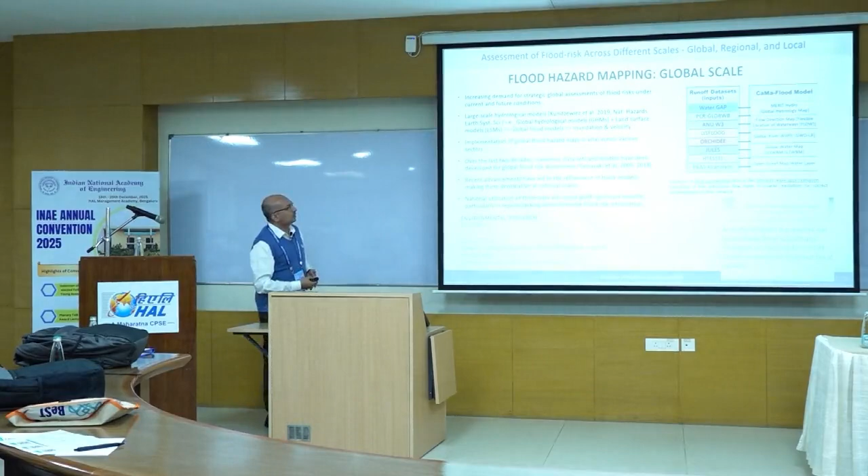But please remember that global flood modeling is for effective hazard and risk mapping, not for precise flood forecasting. So that's the important point.

Finally, I would like to mention two things I understood. There are many regions in India where balkanization is very prominent. If you take the example of Mumbai, flood data and other things are available with MMRDA as well as MCGM — that should not happen. There should be more pluralization, where all the datasets etc. can be shared among the civic bodies themselves.

In every assessment report of IPCC, you can see there is a change — the definition of risk is evolving. So how to address this problem? That is also an important aspect.

In my opinion, there should be a community modeling scheme, as we have different examples like the climate model and the land surface model. That community model concept we need to bring. So if I develop a flood model, that should be available to all, and that particular model should be improved in future. So the community model concept we should bring into flood modeling.

Traditional flood modeling may be difficult to address or to solve this global scale, regional scale, and local scale problem. Thank you so much.

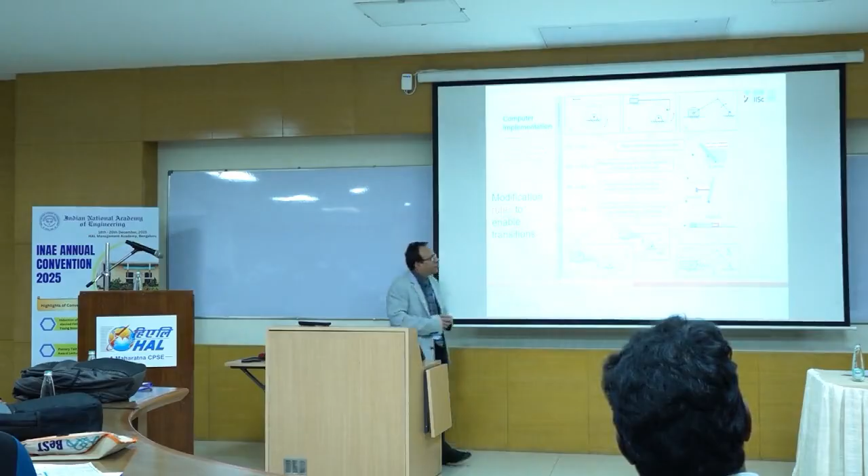Now, there are a lot of other examples. For example, I have an automated tool with which you can create feedback sensors and so on. But let me just show you one more and then stop there, which is the world's first tool on biological inspiration - Idea Inspire. This is something we created with funding from ISRO. We wanted to make our rocket scientists more creative. And what did we do? We wanted to create, for example, very different kinds of solar antennas than the ones currently used.

The idea is very simple: how do I use a glorified database of natural and artificial systems, described using that Sapphire model of how it works, and then when somebody comes up with a problem saying I'm trying to solve this, show which ones are the most relevant solutions that exist in artificial and natural space, so I can simply show them to get inspired. By this inspiration, they will lead to multiple designs. So here, for example, is a non-vegetarian plant called the Venus flytrap, and the Sapphire model is used to describe how it traps and utilizes the essential nutrients that it doesn't get otherwise.

Or a friction disk, which is, as you know, a continuous gearbox that you use for...

Prof, two more minutes. Sure, we're getting close.

And we did that evaluation. Multiple designers came up with ideas on their own, and then when they got exhausted, we introduced Idea Inspire.

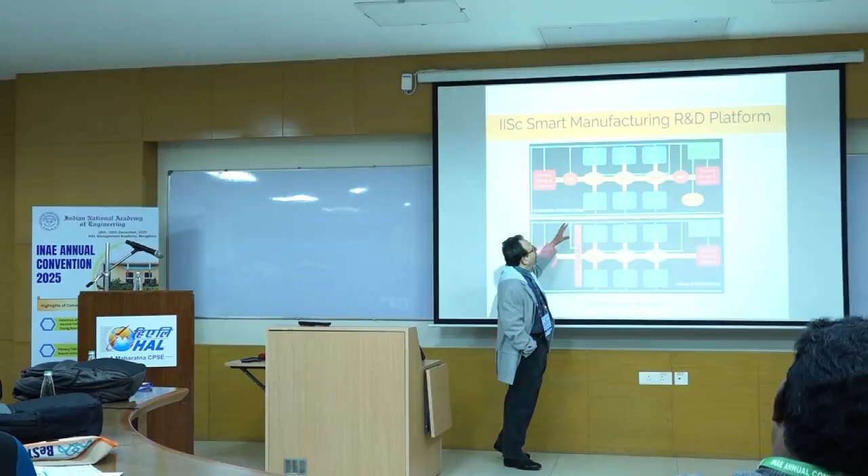But these blue lines are important. They are all connected. We are taking data from all of them, putting it together, making sense of it in an analytics station, and these two can be connected to each other. So you can create all kinds of hybrid factories.

A little bit of automation, a lot of manual, or the other way around. And with that, we can look at how do they play out in terms of quality, safety, productivity, resource utilization, and so on, including sustainability, which has been the topic of today.

So this was inaugurated in 2019. That's a digital twin of the factory. This is the heavy industries secretary using that digital twin to see what's going on. And that's a combination of automated guided vehicle and a cobot to do both dexterity and mobility.

And that's a digital twin in more detail. You see the regular wire EDM, laser router and so on, the automation-centric one, but also the legacy area with regular lathes and other things, and the multiple layers, edge layer all the way to the execution layer.

Last one before I close, and that's IISc DeBox. Another question is, how do I democratize design to school children? And people have been talking about it. One thing we did was look at the way in which training happens right now.

So if you analyze the CBSE exam papers, there's something very interesting that turns out. You know about the revised Bloom's taxonomy, right? That basically says what are the cognitive processes we should train people in: remember, understand, apply, analyze, evaluate, create.

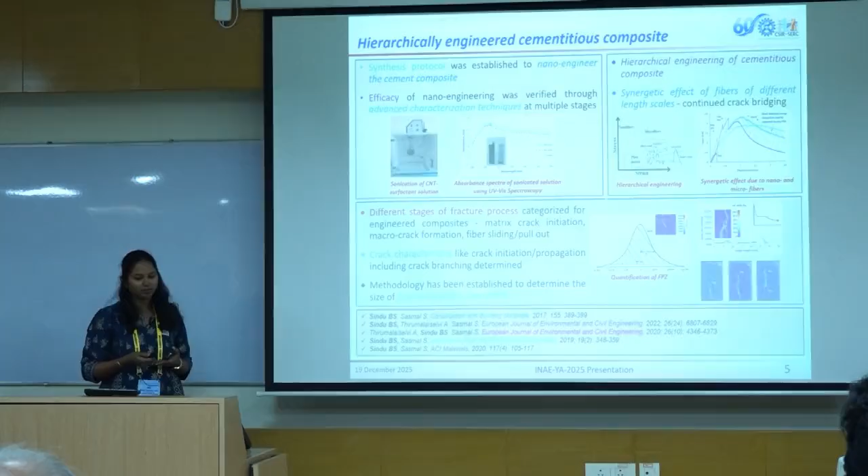Then moving from concrete, we have also done some studies on FRP composites. Basically these FRP composites are used more in the repair industry for concrete structures, and nowadays there are many FRP based components or structures which are being realized. So to understand what phenomenon takes place in this FRP composite and how different environmental degradation factors affect these structures, FRP materials, we have done some fundamental investigations.

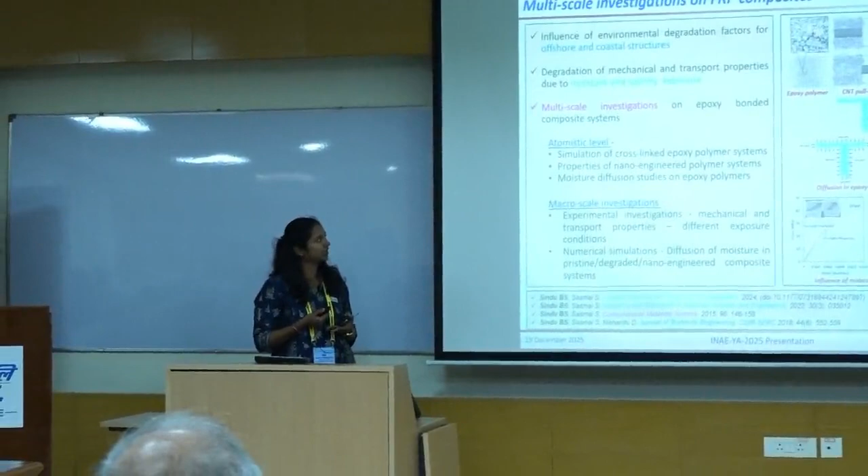Basically in FRP composite there is a chemical or adhesive agent called epoxy, and this epoxy undergoes degradation with different environmental factors. So we have tried to understand how these environmental factors affect the properties of epoxy polymers, for which we have done some fundamental simulations and also some experiments at different length scales.

Sindu, if you could conclude. Yeah sure. So from these fundamental investigations, we have come up with some of the technologies.

One such technology is the piezo-resistive cement-based composite, which can be used as an embedded sensor. It has a self-sensing capability and can be embedded into the structure, and it can also work as a sensor. We have also tried to use this multi-scale reinforced composite to enhance the seismic performance of beam column joints, and also as a retrofit material, cement-based material, which has a very high strain hardening property, or the ductility index is very high. So these are the outcomes of the work.

So in terms of technology, we are also working closely with industries to give industrial solutions in terms of assessing the structural adequacy of the structure, and also to enhance the capacity or service life of structures. So to summarize the work, we have been carrying out studies from the fundamental length scale using the bottom-up approach to understand and engineer the materials which are used in infrastructure. So this is the work that has been carried out. Thank you.

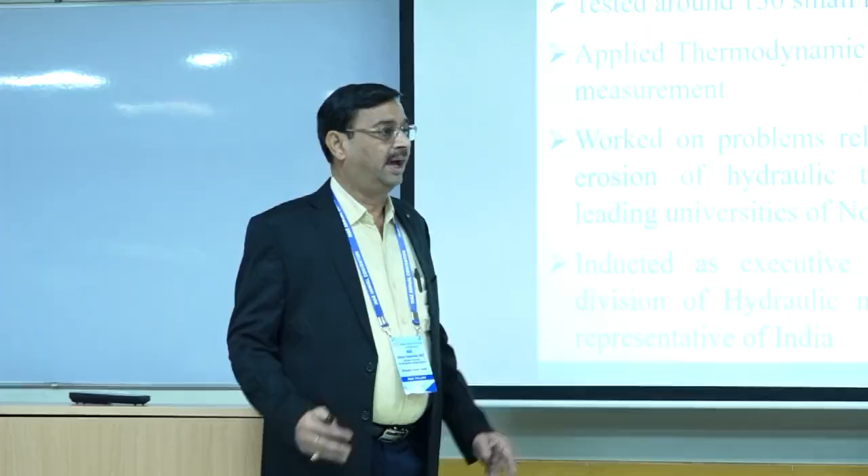This responsibility was given to IIT Roorkee, so we formed a team, and I'm a founder member. My responsibility is the hydraulic power measurement, and the team also has persons for electrical power measurement and some civil engineering persons. We tested around 130 small hydropower plants all over India, advised them to improve their efficiency, and conducted efficiency tests. Particularly the thermodynamic method, which is generally done by foreign country experts, we developed this expertise here too, and I conducted this study in 2 of the power plants.

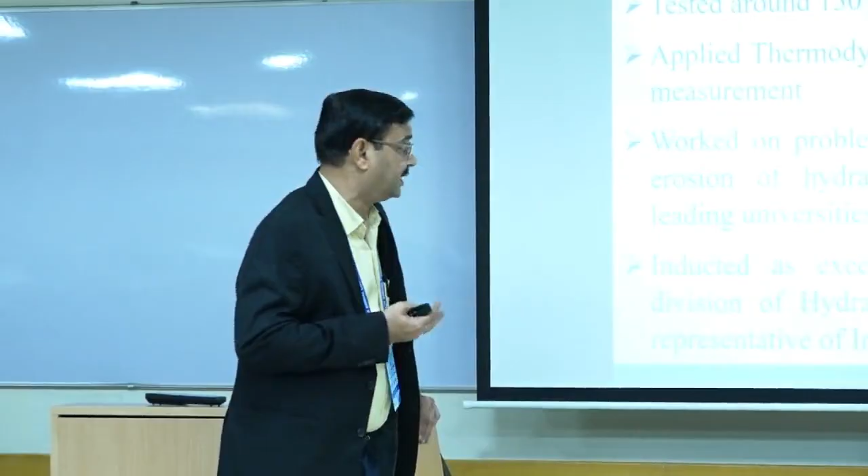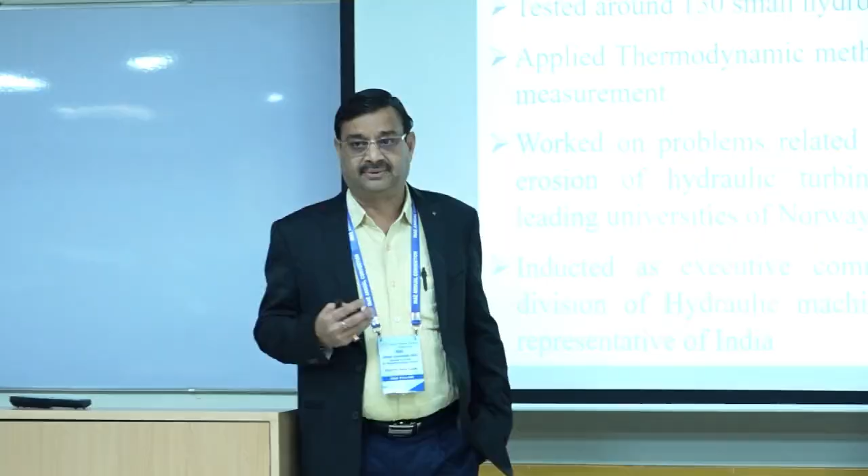Then, when we learned hydropower plants have problems, we started research in operational issues, particularly sediment erosion problems, which occur because of the Himalayan region. We collaborated with foreign universities too, since earlier we didn't have the facilities. Now we have developed our own facilities, so we work with those. I will share some work done with these universities, as well as work I started on my own in my institute. I was also inducted in 2019 as an executive committee member of the IAHR Division of Hydraulic Machinery and Systems, as the sole representative of India. So now we have representation there also.

Now this is a typical hydropower plant, but this is not the only type. This is only the dam-based hydropower plant, where we have the turbine and the tail race, and some water is coming with some hydraulic power, and then it goes to the generator and the transformer and then the grid.

My focus is the turbine particularly, because I am a mechanical engineer. And we have seen that nowadays also a lot of penetration is there because of the solar and wind energy, which are the intermittent form of energy.

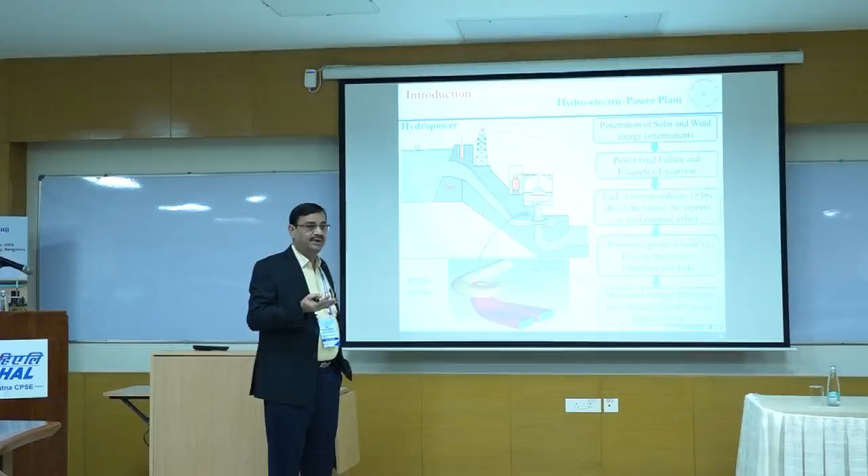So when we go to the testing of the power plant, we find that there is a frequent power grid failure, and there are some frequency excursions also. Because of that we feel some vibrations, because of the potential variations.

And there is a notion that each start-stop reduces 15 hours of the life of the runner, but no data are available if you do the load ramping to balance the power because of solar and wind intermittency. So we started a study on the transient operation of the power plant. Particularly this is true with small and medium hydropower plants, those not in the captive category. And we started this investigation.

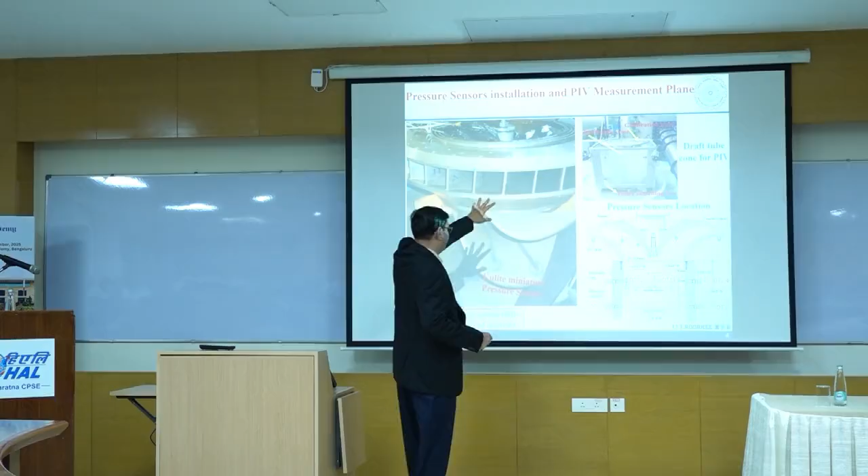So what we did is we fitted some miniature sensors on the runner, and some sensors on the draft tube. They are pressure sensors to monitor the pressure. We maintained a special arrangement to measure the velocities also in the draft tube cone, which starts just after the runner. Here is the plane where we have measured, and this is the center line where we are monitoring the velocity. So we have measured the full flow field, pressure and velocity in the draft tube, and pressure only in the runner, and in the vaneless space between runner and the guide vanes.

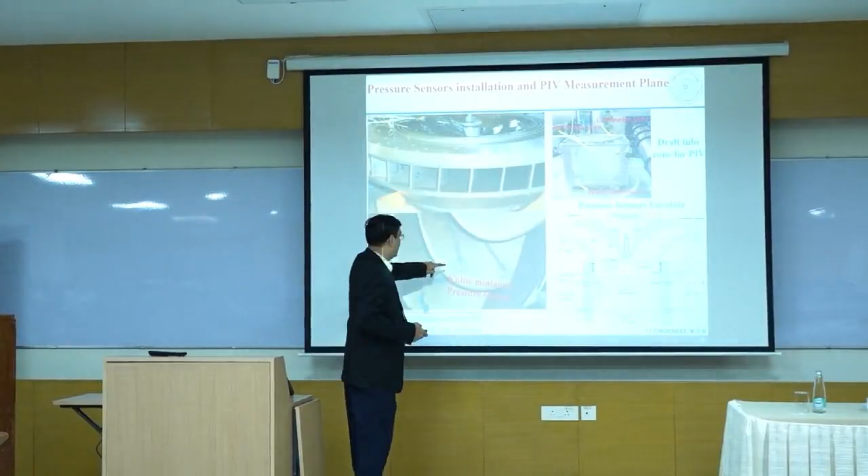When we see this, this is the pressure P12, P72, and we have named them here. And one is the suction side, P71. So these pressures, we have seen, when you reduce with load rejection, these pressures will be fluctuating.

And if you stick to a small window where the frequency is around 1 kilohertz, there you will find that there is a lot of fluctuation over the mean pressure. The pressure will give you some frequencies in the runner which is equal to the guide vane number, and in the vaneless space which is equal to the runner blade number.

Now if we see the velocity variation, which we have measured using a particle image velocimetry system, from high load if we come to below best point, there is some stagnation region forms, and that stagnation increases, decreases, and that gives a phenomena of vibrations.

One is the plunging component and another is the rotating component. So plunging appears before and earlier, and then the rotating component, and then as we go to the part flow, the problem becomes more and more severe.

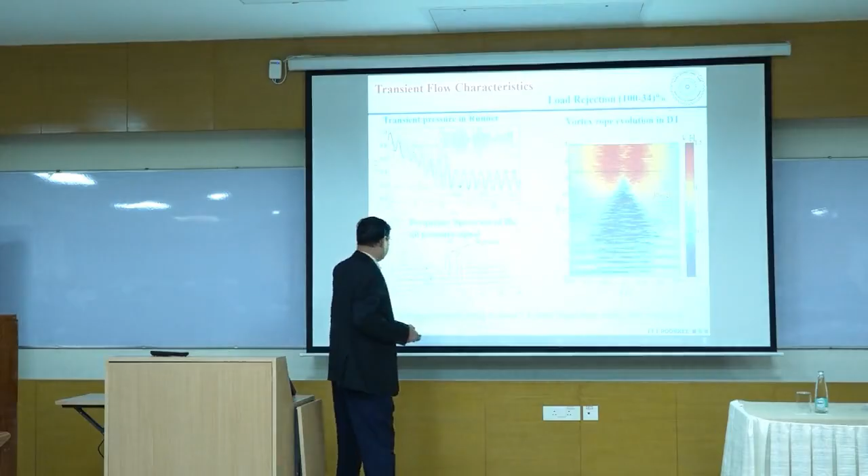And the same thing if we are going to load, in this case the transient pressure loading in case of load rejection is 2.8 times larger than the pressure fluctuation in the steady state. So this also gives a loading on the runner.

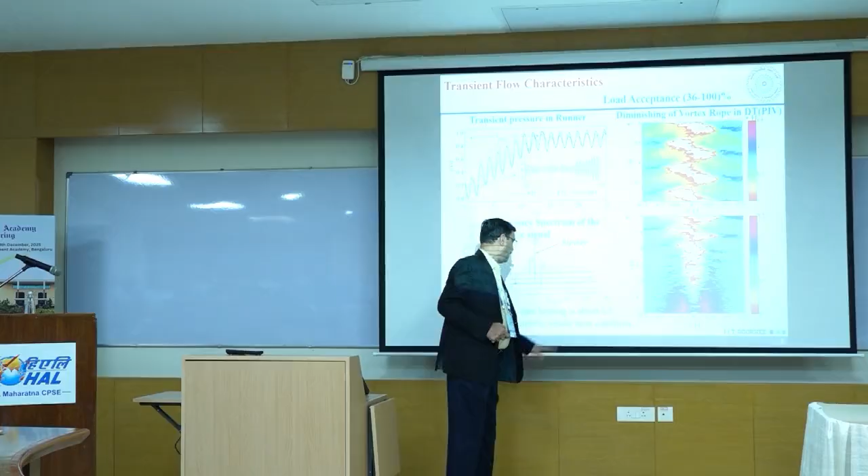Now if we go to load acceptance, it is 36% to 100%. Then we are having again a separated flow will converge, and here this stagnation region before reaching the best point will diminish, and then again our flow becomes full flow in the draft tube. Here again this transient pressure loading is a little lower, it is 2.1 times compared to the load rejection of the steady state condition, but still we are having transient loading here.

Now if we see the emergency shutdown, meaning suddenly if there is a grid failure, then suddenly it will go down. If you are having an emergency shutdown, then it will result in total load rejection, and that gives you more pressure fluctuations in the runner, particularly in the vaneless space, it is 200 times, 200%.

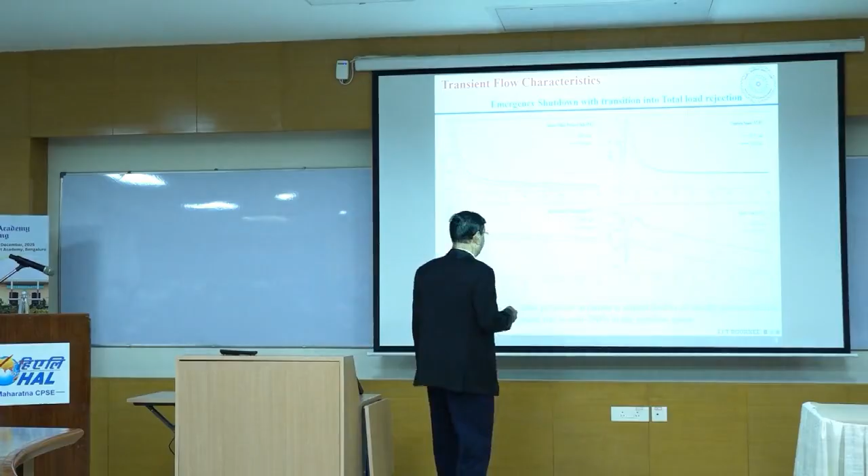If we see the pressure fluctuations, then around the mean line, the best point, runaway, and this runaway is for runaway from 9.98 degree, which is the best point condition. This is the full load condition, so full load condition you are having more pressure fluctuation, either in the vaneless space, blade suction side, or runner side, or the draft tube. The draft tube will have the minimum fluctuation, around 0.02 around the mean line.

So that gives you the pressure fluctuation in the vaneless space, which is highest at around 1.8 to 2.2 times of the BP condition. So if you are running the turbine at the BP condition, then your runner life is much higher. But if you are running it to the runaway condition frequently because of frequency excursion or start, your life will be reduced.

With this, we have seen that if we go to proper shutdown, sometimes it requires sufficient time, then pressure fluctuations are not very high, but a vortex rope will form when you go to high load towards BP, and after BP again you get vortex formation. So during shutdown also you get vibration because of vortex rope formation. Similarly, during startup, vortex rope forms earlier, then diminishes as you come to BP, and you have proper flow condition, so there will be no vibration, either in the power plant or while starting or running.

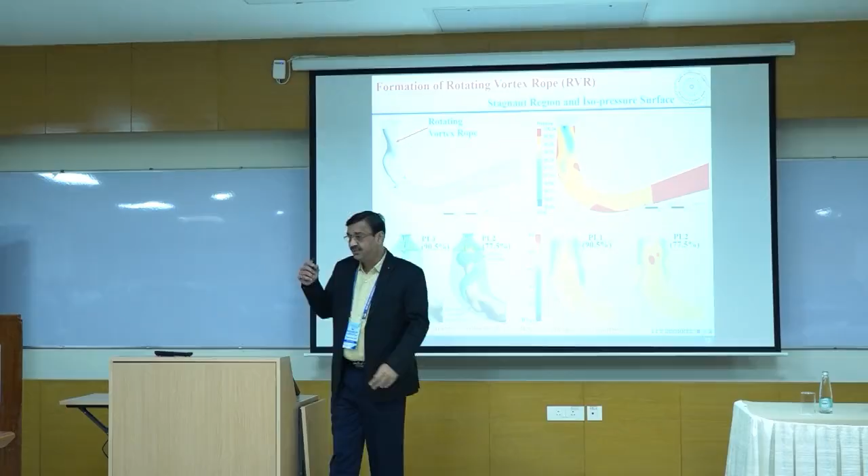We started and made measurements of the draft tube and found that this vortex rope frequency forms at 0.28 times of the normal runner frequency. If you see this vortex rope formation, there will be a zero axial velocity zone formed, and if we can diminish this zero velocity zone, then we can overcome this vortex rope formation.

So we built a special test rig where we have a turbine, and in the turbine we have a method of injecting water jets as well as air jets from the surrounding, so that we can break that stagnation zone.

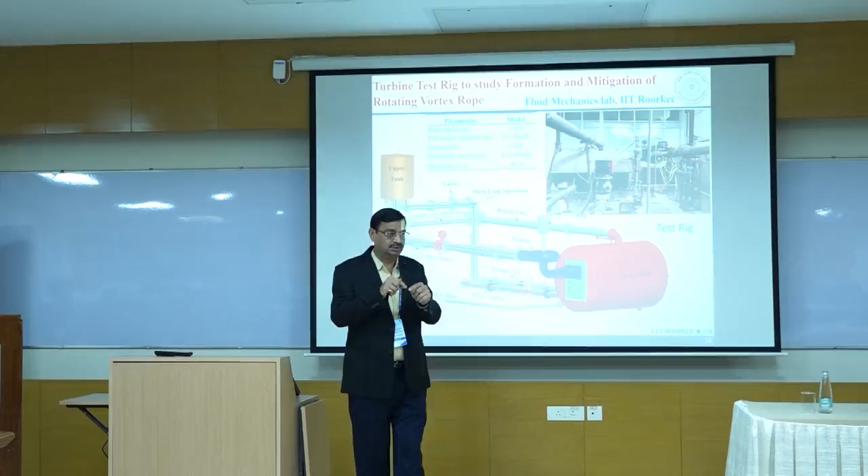This testing was not done earlier; earlier people were doing swirl testing. Now we started water jet injection, with the water jet as a percentage of main flow going up to 2.5% maximum, and we found that we are able to diminish this peak pressure pulsation by 73% in case of plunging, and in case of rotary we diminished it around 65%.

So we are diminishing their damaging effects a lot. Now if you see this spectrum analysis, this is the RVR frequency which diminishes if you go to 0.5%, then 1% and 1.5%, and you will see there is no RVR frequency being seen here.

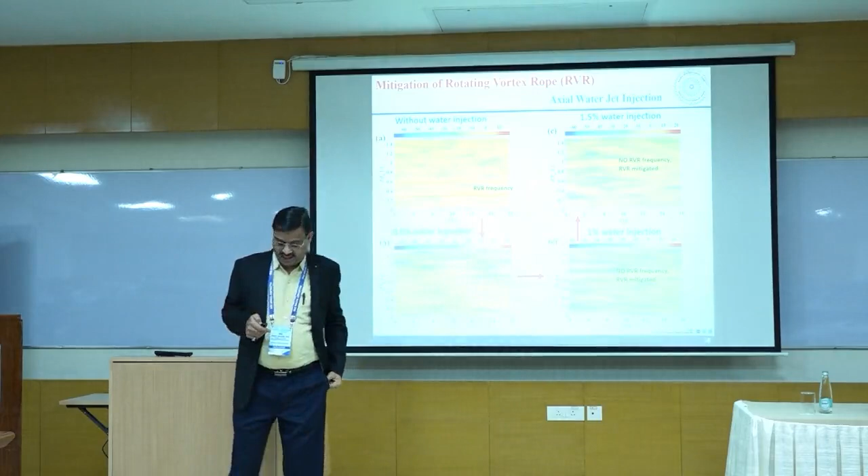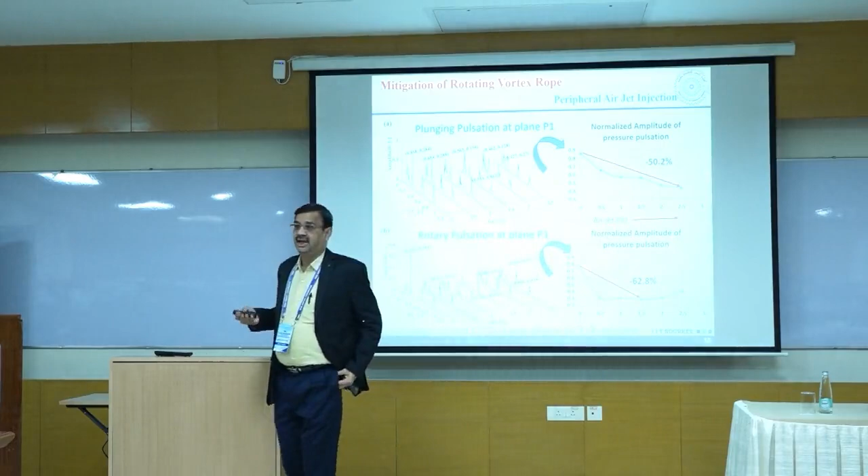If you go to peripheral air injection, then you get diminishing of the pressure pulsation by 50% or 60%, both in the plunging as well as in the rotary pulsations.

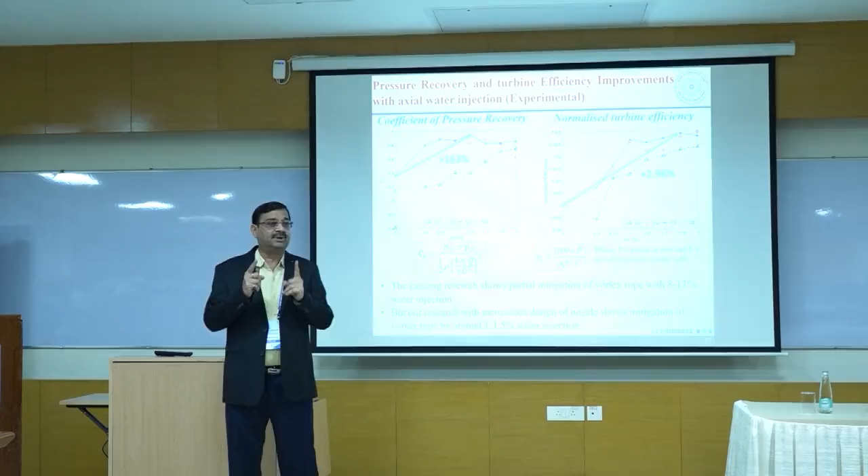If you go to combined air and water jet injection, even 1% water injection and 0.25% air injection will diminish it all. But the existing literature says you have to inject around 8 to 13% of the main flow water to diminish this. We have especially designed the nozzle to come down to 1 to 1.5%, and we are even able to improve the efficiency.

Our key observation is that runner life is affected not only by start-stop, but also equally by load ramping. The maximum pressure rise is observed in the vaneless space, about 200% during shutdown and load rejection, and transient pressure loading during load acceptance and load rejection is around 2.1 to 2.8 times. Vortex flow can be mitigated by a very small amount of air injection or water injection, but you need a proper method. We have shown that 1.5 to 2% or 1 to 1.5% can do it, and the water injection can improve the pressure recovery.

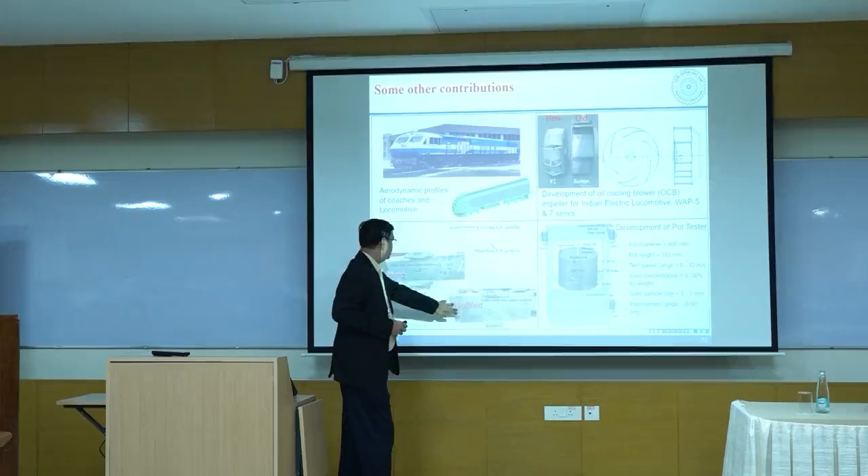This is the rig we have patented for measurement of erosion. This is a project we started way back in 2020, just when COVID was about to spread. This is our team, which has something very peculiar to academic institutions: we have two lieutenant generals who are part of this team, which is not common in academic institutions.

That is how this project was conceptualized and taken forward. Now, for artillery shells, we always want longer and longer range, which is always desirable by the military. How do you get range? If you do a simplistic high school calculation without atmosphere, you get V squared by G, and you'll find the range from a Bofors gun would go to 72 kilometers, whereas the actual range comes down to 24. So drag plays a very crucial role and reduces the range.

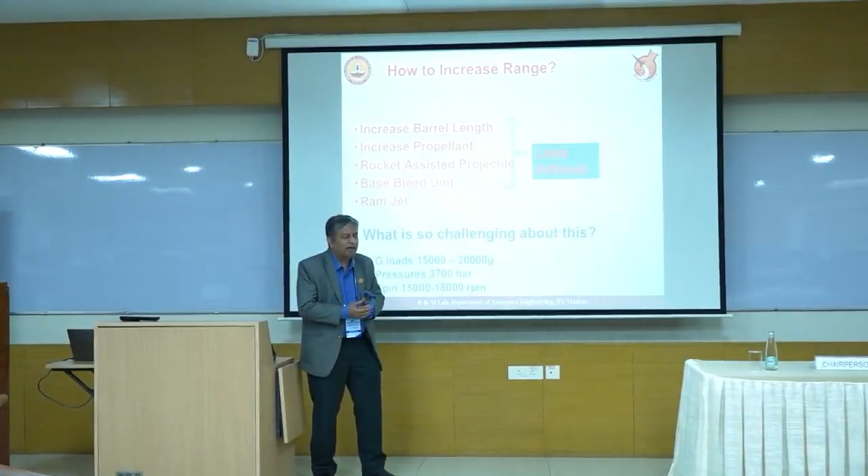So we looked at something possible with ramjets. Why ramjet? If you look at what comes out of the gun, it's usually more than Mach 2, most guns, and goes up to Mach 3 in some guns. So Mach 3 is a very good starting point to have a ramjet operation.

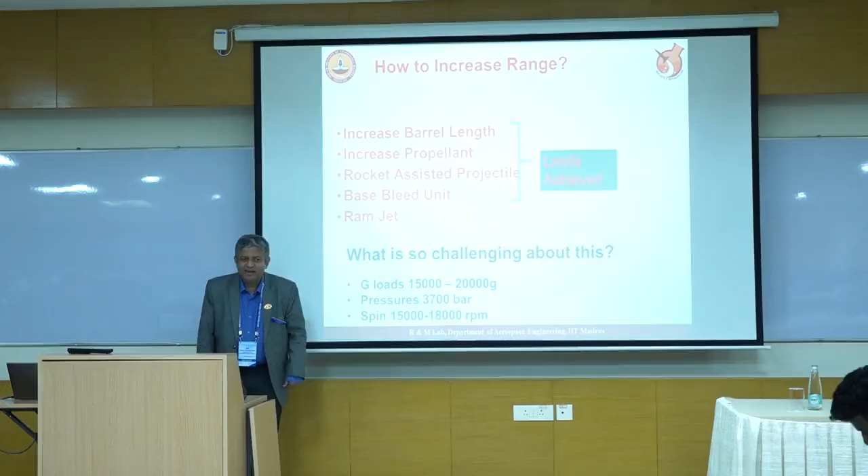If you look at the challenges, most of us in the missile community think, oh that's very easy. But in a gun the biggest problem is G-loads, which is 15 to 20,000 Gs, pressures of the order of 3,700 bar, and RPM spin of the order of 18,000 RPM. So with all this, we started.

When you look at ramjets, most of us think of the BrahMos configuration, which is front-ended. But with a general on board, we had difficulty pushing it through because he said, I don't want to throw a grenade to 100 kilometers—what's the point, because the explosive content would be reduced.

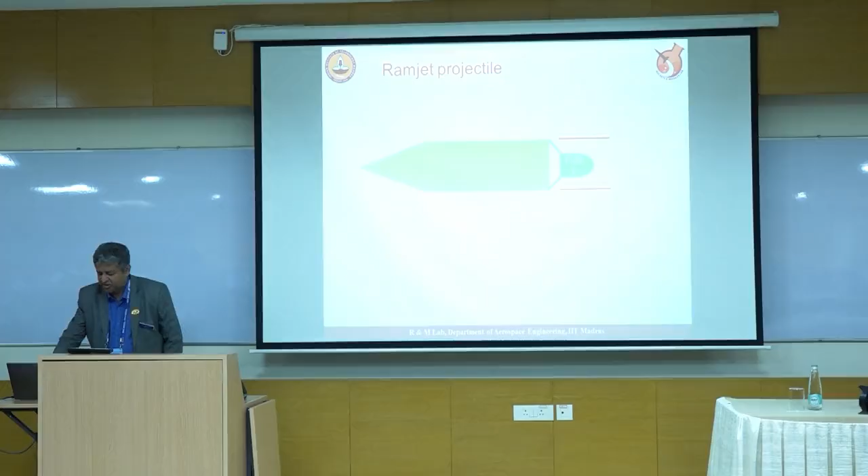So we looked at an alternate design not thought of anywhere else. We had a base bleed unit, took it out, and made something which is a side entrance or submerged entrance, as it's called in the literature. So air comes in, mixes with fuel, and burns. It's an existing shell modified to accommodate this ramjet—the base bleed unit is taken out and the ramjet unit is attached.

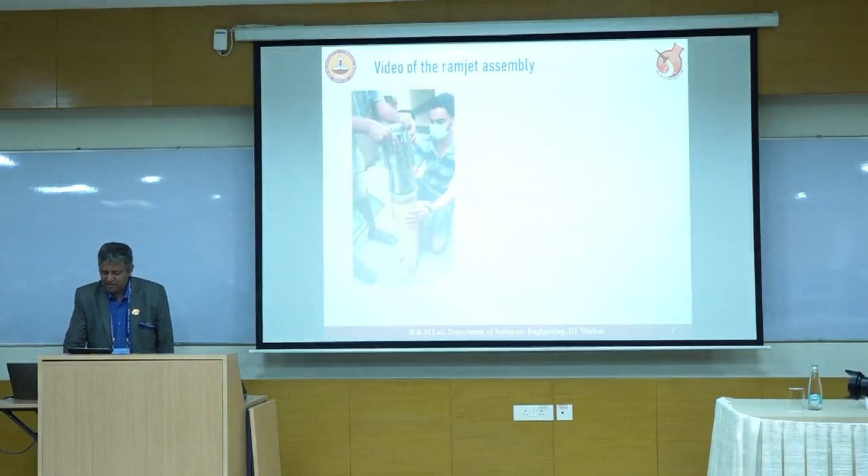Let's go to the end in the interest of time. There is an increase in the length of the projectile, so balancing and other things need to be taken care of very seriously. For such a design, you first have to do the aerodynamic design—we did that—then also a propulsion design, which we did and tested.

IIT Madras is the only institution with a license to make its own propellant. This was not thanks to me, but to my predecessor, Professor Krishnan, who set it up back in the 90s. So we can make our own propellants. Then what we did next was something very interesting: combine aerodynamics and propulsion, by putting this in an open jet facility and testing it.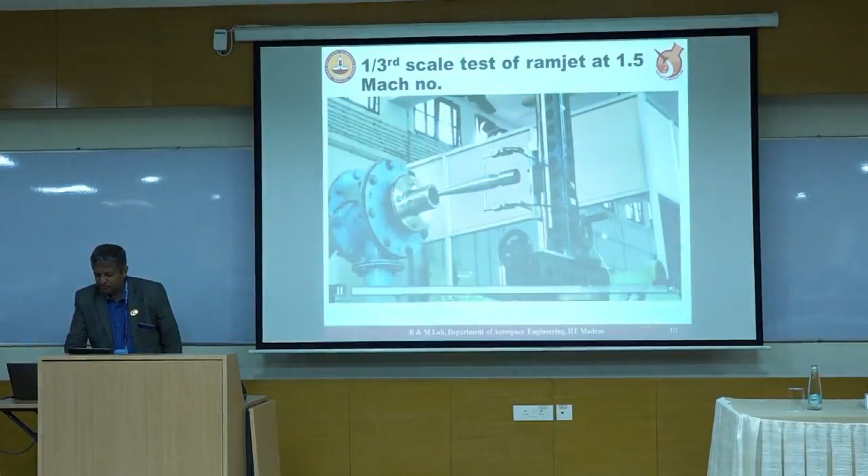That was also successful. As you can see here, there were two places where it was held, and as usual, it will have a different drag on both the limbs. But the good point is the drag is getting reduced as the propulsion system is switched on.

So with this, we went ahead because we are making a new projectile for the Indian Army. You go and ask them for a gun, they'll say, how can I guarantee you, a gun costs a lot. How do we do this? So in order to break the jinx, we said we'll make our own gun. And we made this gun, and the Indian Army was very nice to us.

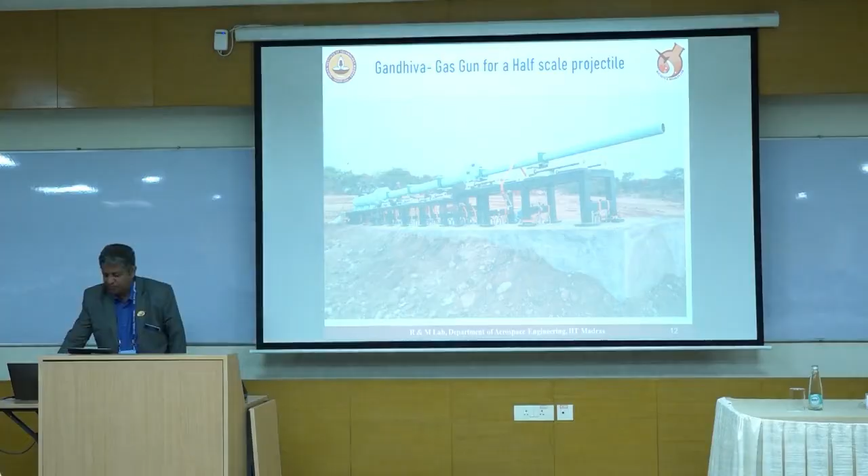They gave us land in the School of Artillery to build this and put it up there. So with this facility, we made our small projectile, 76 millimeters. And when you start looking at real life problems, it always throws up something that you never anticipated. We had spectacular failures, wherein projectiles broke into pieces, like one of the above. But with a lot of effort, we were able to overcome that. We must have fired at least 60 to 70 such projectiles in order to experiment and understand this.

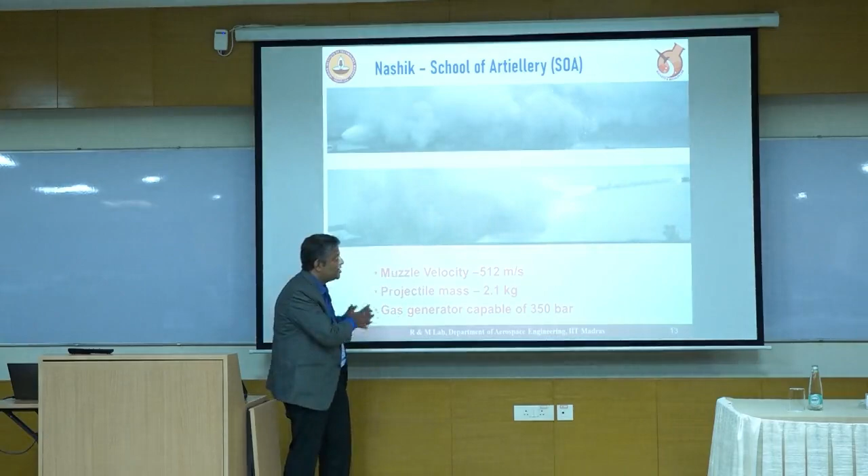And we were able to get a mass of 2.1 kgs to 500 meters per second and show that the ramjet is active. That was one of the key things that we had to do, and it comes out clean from the gun and all.

So after doing that, we then looked at the full shell, wherein this basically is the ramjet. The weight increased, and we had to 3D print this ramjet, completely 3D printed. And this is the first time in the world that such an existing shell has been modified with a ramjet and tested. We went for trials in Balasore sometime in February of 2024.

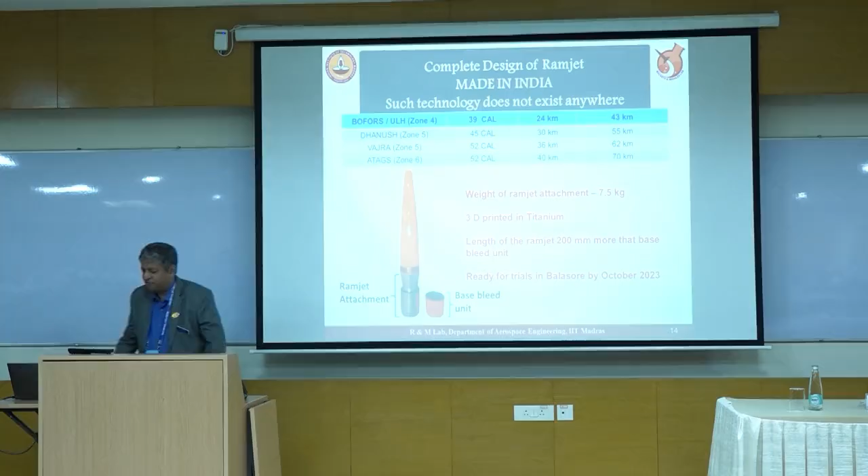And the first day, first show was a very nice thing. It came out all clean and we were all very happy. But...

Happiness doesn't last long. And as you can see here, the ramjet where the threads are applied, that broke off, and it was a very, very challenging problem to overcome this. But the good thing for us was it came out clean from the gun, and the internal ballistics, as they call it, was very good. The ramjet was also activated. In fact, we had a small fire set up in this thing because of our ramjet activation.

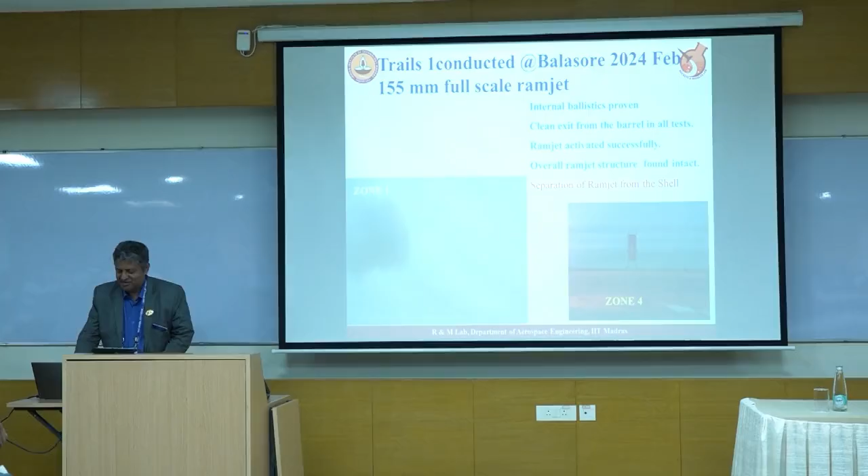And then we had to do a lot of experimentation to understand why this went wrong, and analysis. Based on that, we went to the School of Artillery in Devlali to fire this at lower zones firstly, to understand if everything is fired. So this was successful, and after this...

As I said, things don't go your way. You do all things on your side, but the radar didn't pick up where the round landed. So you will have to go back again and do it so that the radars can pick it up and we can establish the range.

Talk about what we have been doing in our group for the last, let's say, 14-15 years, and some glimpses of the work, because time is short and going into each of the problems will take a lot of time.

So why do we need multi-scale? Obviously, most of our engineering problems, not just 90% of them, have multiple scales happening dynamically at the same time. For example, if you look at supersonic flow going over a simple plate, it's a wall-bounded flow, and you can see a lot of scales taking place, small scale and large scale. So one needs a single unified framework able to capture that.

That's where the single-scale limit comes into the picture, because once you try to capture those dynamic features in a single scale, and approximate or leave out some of the other scales in the flow, you will have inaccuracies in the result.

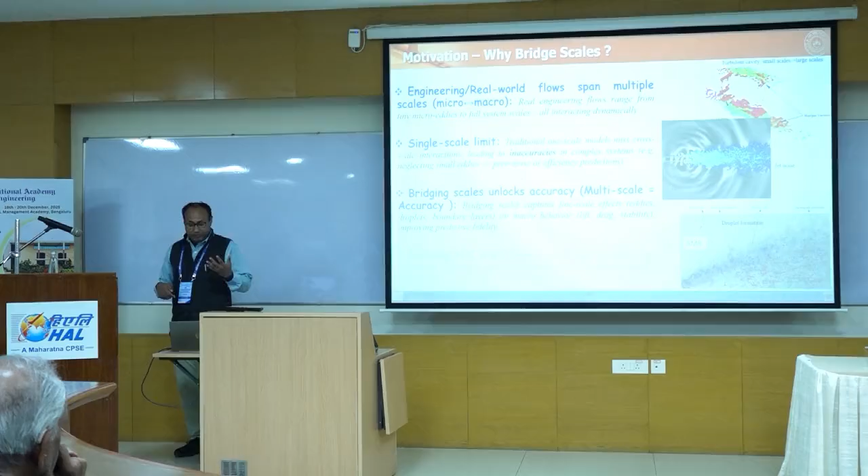Simply, if you look at jet acoustics, there's small scale and large scale structure, with feedback loop mechanisms coupled together that create wave propagation. The way I'm defining acoustic propagation may not be that simple, but just to give an idea how things happen. Obviously, bridging the scales creates an advantageous situation, letting you bring in multi-physics and multi-scale accuracy.

Here's another example: a two-phase system with liquid jets coming out, forming ligaments that break down into small droplets as they move into the Lagrangian framework. That means in one single go, I need something with both Eulerian and Lagrangian representation, along with all the surface curvatures.

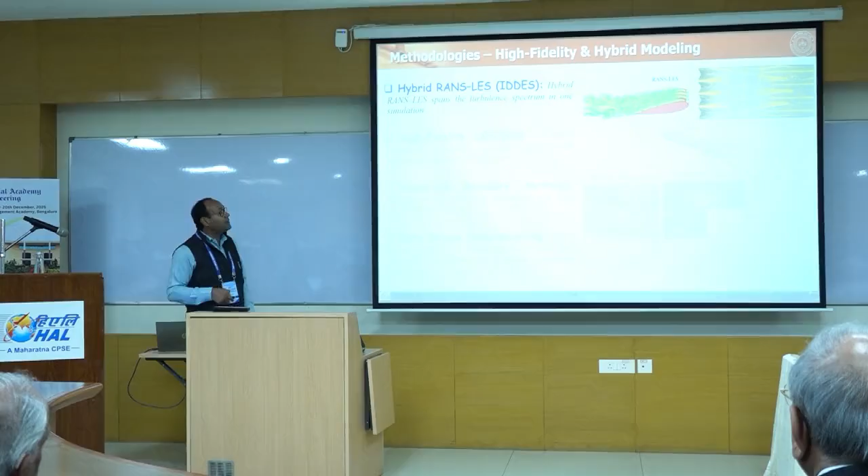So the methodologies we've been adopting include hybrid RANS-LES. We adopted this for some earlier ADU work, looking at shape modifications of the airfoil and how you can change the stall limit, essentially pushing the stall limit further.

Then we had DNS calculations where we looked at small to large scale structures. These involve few-million-point calculations taking a few months, but today we can talk about these things because of the computing power we have. Then there's the immersed boundary work we took up, which can handle a lot of complex problems with ease.

Data-driven tools were also applied to some renewable energy systems, where we are predicting or focusing on wind turbine data and some energy harvesting data. We have a lot of simulation data to train our model for that.

Coming back to the applications, I'm picking up only a few examples. In aerospace engineering, when fighters drop bombs, that's the weapon where a lot of cavity system phenomena happen. Due to fluid dynamics, you get a lot of noise, and this noise can create trouble. So one issue is how to mitigate that noise. There are different strategies people adopt, like having a front cavity or back cavity, so that you reduce those dynamical features, essentially reducing the noise and achieving a stable system.

Then combustion instability - this is another example we did for ISRO, where they have a multi-element combustor for their methane LOX combustion. We are trying to look at their injector dynamics coupled with the system. This is just a couple of examples to give you a glimpse of what kind of applications exist in aerospace - there can be enormous other applications.

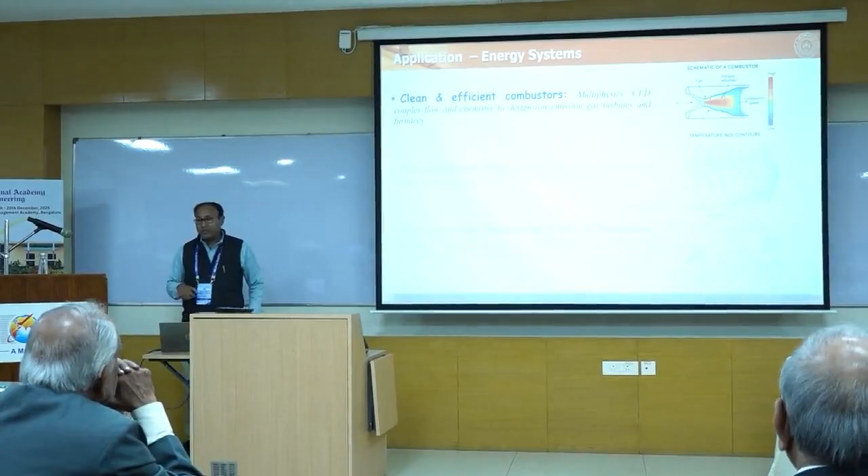If we come to energy systems, we talk about gas turbines and other turbines where we have low emissions, reduced NOx and temperatures, so this can give a clean and efficient system. Turbo-based flows, where you have secondary flow predictions, flow leakage, blade aerodynamics, fluid structure interactions in renewable systems like wind turbines, hydro turbines, or heat exchangers.

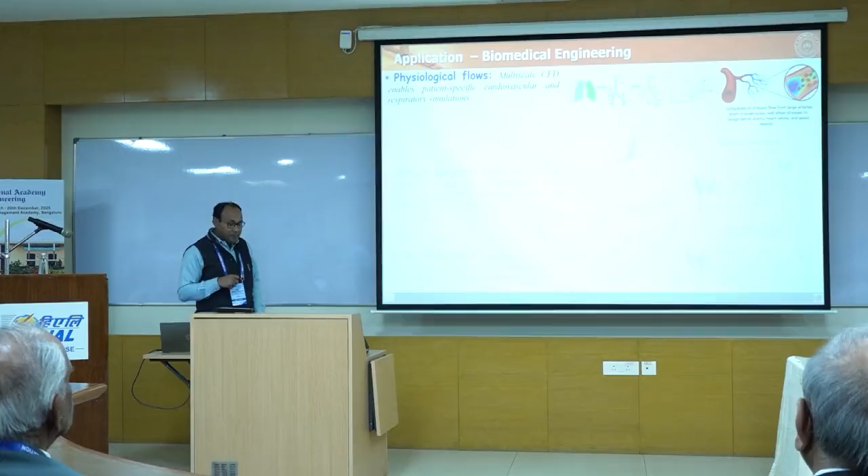Another interesting application, which I picked up out of curiosity, is looking at blood flows in large arteries so that you can have predictive capabilities. Yesterday's inaugural talk touched on this, where we are heading into biomedical systems, or similar systems in the brain. This shows some calculations we did at one point, where the artery is not in healthy condition. Obviously, futuristic medicine should be in that order - not a specific treatment that may or may not work, but rather a system trained on data. This is where biomedical engineering is probably heading, where our database or data-driven system can become quite handy.

Now coming back to some of our work in the high-speed area, we have done a lot of coupled multi-scale solvers - some for ISRO, some for DRDL for their hypersonic systems. This is work we did for ISRO, where we did a coupled aeroacoustic simulation - a 1.4 jet with a plate and how the acoustic propagation happens.

This we captured. Then this is an intake, hypersonic intakes, where we try to look at the shock-boundary layer interactions and why the unstart happens. While looking at that, we also delivered to DRDL some codes which can be used for design. This work is also for DRDL, where we are trying to mitigate the cavity oscillations as I talked about earlier.

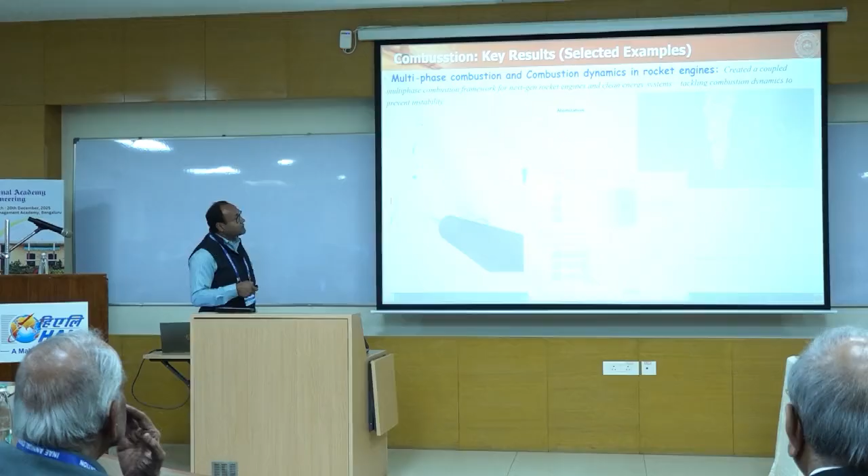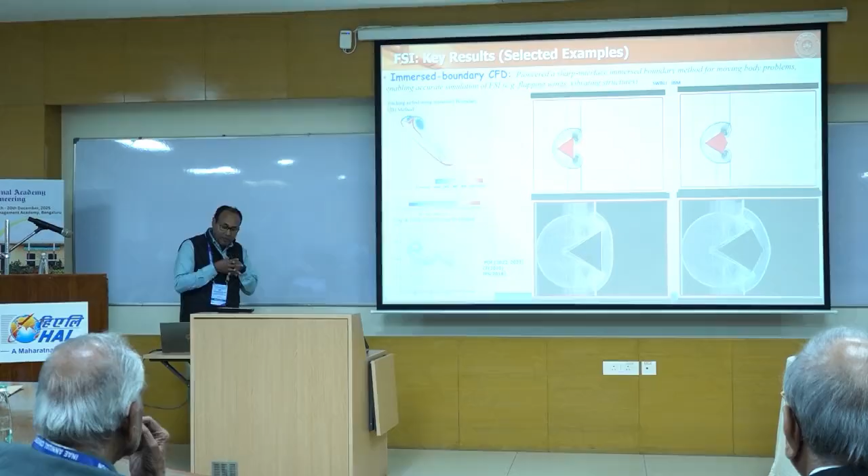Then this is again the immersed boundary technique, where we are looking at flapping systems - biomedical applications mimicking insect flights, or three-dimensional aspects, or shock-boundary interactions to capture where the shock moves the bodies on both sides, and all this.

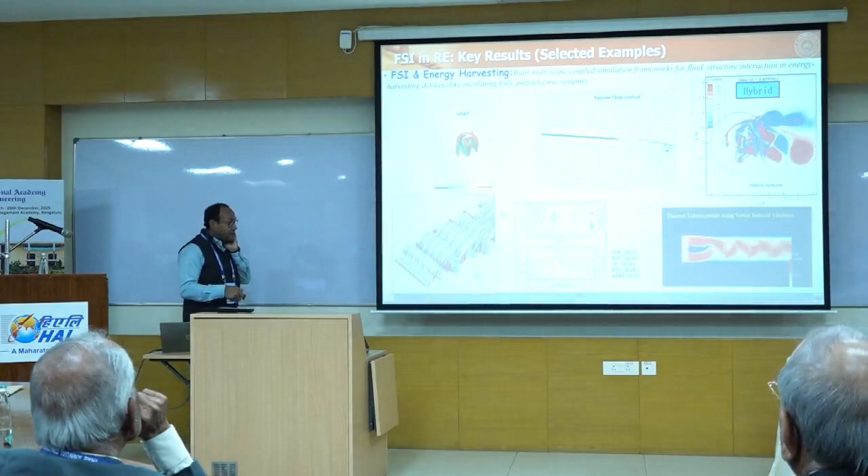Some of the applications we have been doing in the coupled system: wind turbine control, or the control of hydro turbines, or mitigation of the hydrokinetic turbine where we can improve the power output. Some other things from the chip design area, where we are trying to look at thermal management or enhancement due to very narrow paths.

So where we are going ahead in the future is the digital twin, where you have a real life system that can predict what can happen, and this is where your high fidelity data or exascale computing comes in. This is some data we are working on that can show you the numbers. That's what I said, with exascale data we can actually do a full scale simulation, or apply it to transport energy and things like that.

For example, you talk about EV, what would be the aerodynamics, how to optimize the aerodynamics of the EV, or the fuel. What it requires is collaboration between industry and academia, and obviously a lot of interdisciplinary systems need to come on board. As I said, the bridging scale provides a better solution, and it has already proven impact in different areas, some of which I have just shown you.

So you can come up with some more modeling and all this, and with the advent of HPC AI systems, probably it can actually allow you to get a full scale simulation of it in a day. Thank you, and I would like to pick up some questions.

Question: Sir, up to how many Mach numbers can we simulate? Which one, Mach, sound waves? Sound waves, right now we have done up to Mach 2.2 jet, but you can go higher than that.

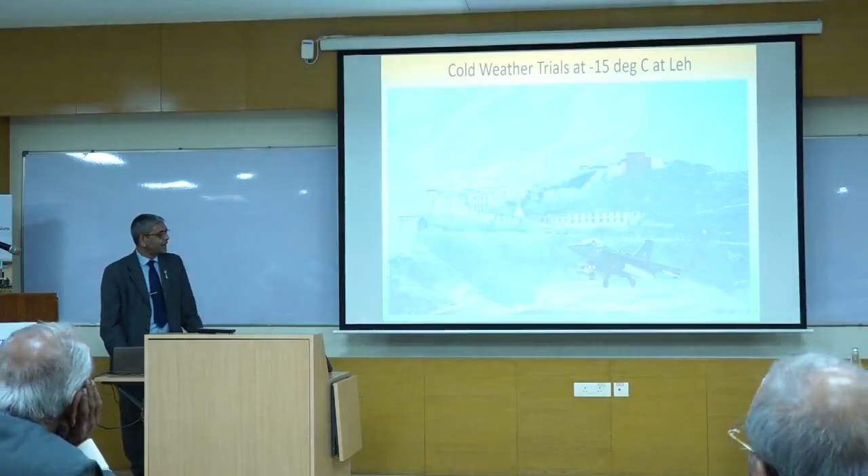But when you are making an aircraft for your country, you have to make sure it satisfies all the requirements. So all these pictures are there, flying in the Himalayan terrain and in hot weather trials - like summer in Bangalore, you won't realize it, but as you go elsewhere you do. So we had to go to various places, and the cockpit design had to make sure it's not only a flying platform, but a fighting platform.

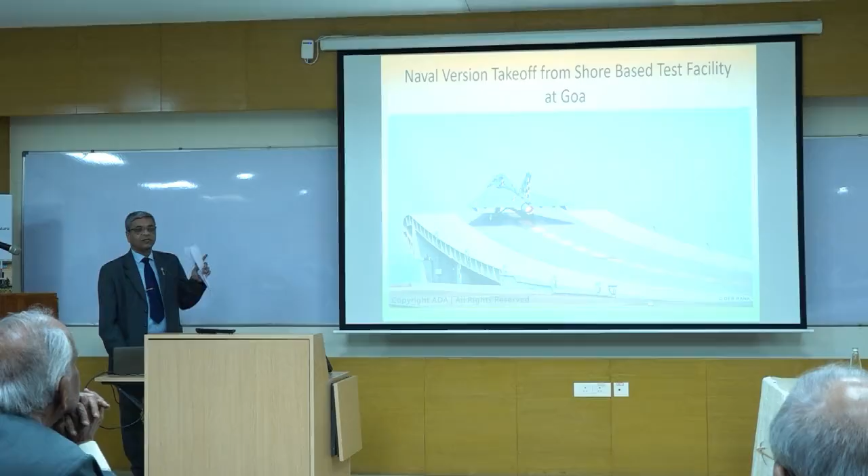So that's where it goes on. We have one called the Navy version, which has not entered squadron service, but as a technology demonstration we have already made sure it is able to take off from a shore-based runway and from a carrier. We have done more than 100 landings. It's a single seater, and our Navy technology demonstration phase is over.

Our Navy wants a twin engine fighter, twin engine basically. So my submission to the Navy is to buy this aircraft as a training platform. Okay, so with that mindset I'll make sure I go fast.

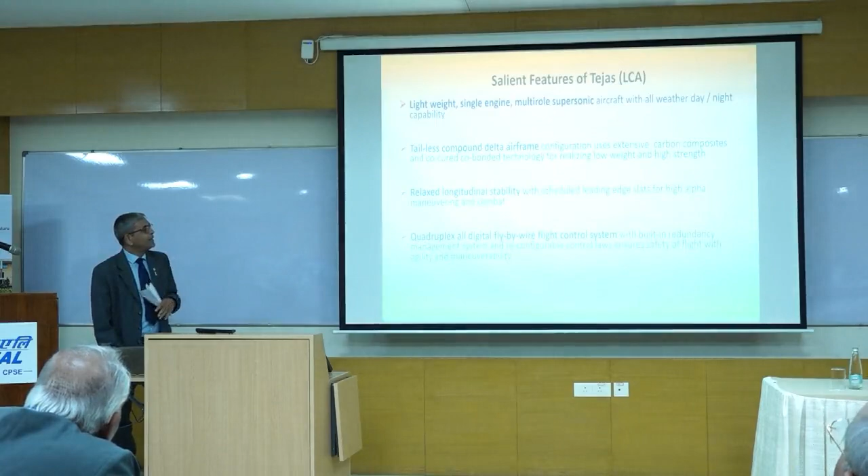At the same time, my previous speakers have covered a lot. So typically this aircraft is a lightweight single engine, multi-role fighter, capable of air to ground and air to air operations, supersonic - goes more than the speed of sound - and capable of day and night operations.

It is tailless. Typically in a civil aircraft, you will see wings and a tail. In this case, we use a delta airframe, so the same elevator surfaces are used for elevator control. Basically, an aircraft has pitch, roll, and yaw motion. The surfaces at the tail are generally used for pitching motion, but with the aileron, one surface goes down and the other up - that's what's there in the typical civilian wing and tail configuration.

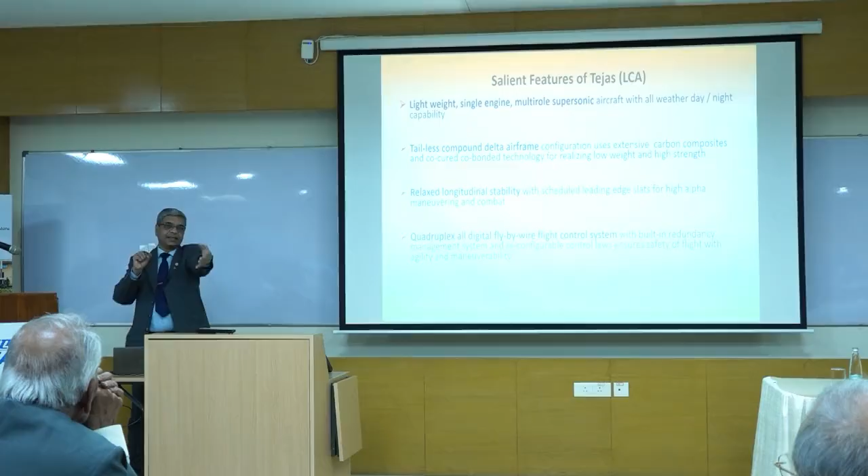We have this tailless delta configuration mainly for supersonic performance - it's made so that you get supersonic maneuverability. Imagine when an aircraft is flying subsonic and drops a bomb, it will cover some range. With a BVR missile, if you are already supersonic and you launch it, you can cover a much bigger range because it already has that velocity - that's where it speaks for itself, with relaxed longitudinal stability.

It is made intentionally aerodynamically unstable, so that when the pilot pulls it, the aircraft goes quickly. The agility part comes very fast. You would have seen air show maneuvers, usually they carry out, and then it really speaks to the world. That's what it is.

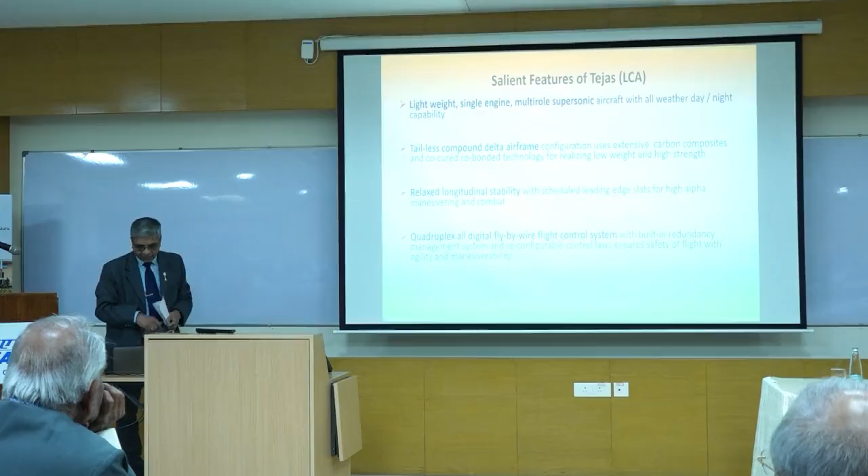So this is relaxed longitudinal stability, and this is the key element where this aircraft cannot be flown without the flight control system, because it is so unstable. Because of that, this quadruplex-based flight control system is required. And this is the place where I played the bigger role - 30 years I have been in this program.

Objective is that the aircraft is unstable, the controller is going to stabilize it. But the pilot's job is not to fly - his job is to make sure he should fight it, he should be commanding the aircraft. So when he pulls back the stick, the aircraft will respond, but without departing. It will make sure he is able to fly at the edge of the flight envelope.

So one is the aircraft getting stabilized, the other is making sure he is not departing. We call it carefree maneuvering - meaning he is able to maneuver everything without worrying about the aircraft departing. He is commanding, he is no more flying the aircraft, he is just commanding. And that is the aircraft which you are making.

So this is one aspect, and I'll just keep this part. The conventional aircraft I already talked about is stable, our LCA is unstable, therefore the digital flight control system. I'm going to skip this part, but the advantage is because it is made unstable, you get gain in lift and decrease in drag. But that is not the main purpose - the main purpose is maneuverability. You can carry more weapons, more passengers, anything.

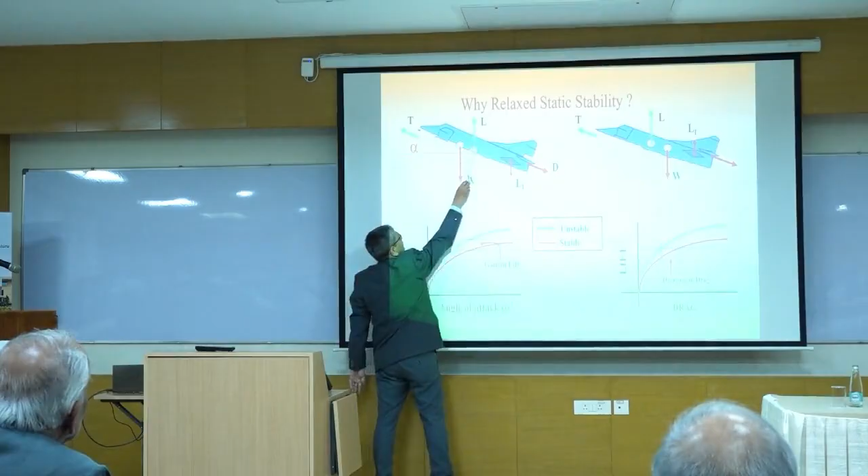This is a stable aircraft, it becomes like a car. Think of a car versus a bike - a bike has got more maneuverability. So this is what happens.

So by making it intentionally unstable, in our case also the lift moves, but it becomes neutrally stable or just stable, and the supersonic maneuverability picks up. Now in supersonic, I am able to give the missile higher range with maneuverability. So that is where it becomes state of the art. Obviously a digital flight control system is a must.

But if you have got one computer, it can stabilize, but if it fails, nothing - you will have to reject it. So therefore quadruplex is made. What is it? Quadruplex - all four are working together. First failure, still operational. Second failure, yeah.

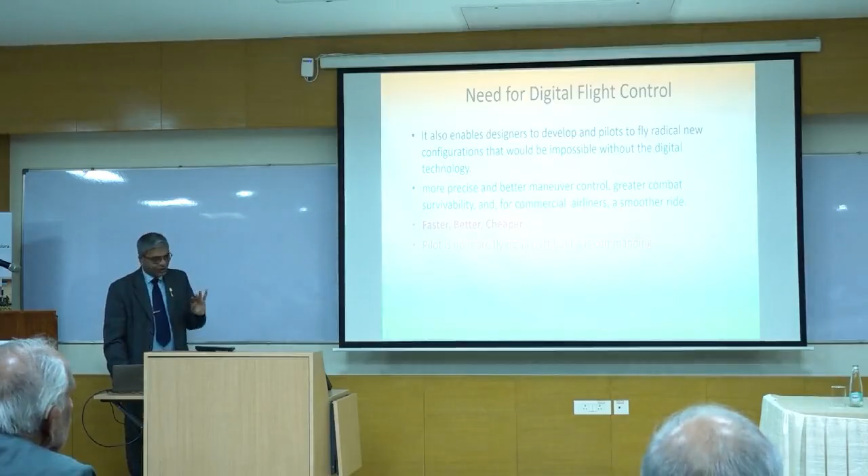I'll make sure, thank you. The second failure, operational - if that fails, what do you take? Okay, I am going to skip that, I think I have conveyed it.

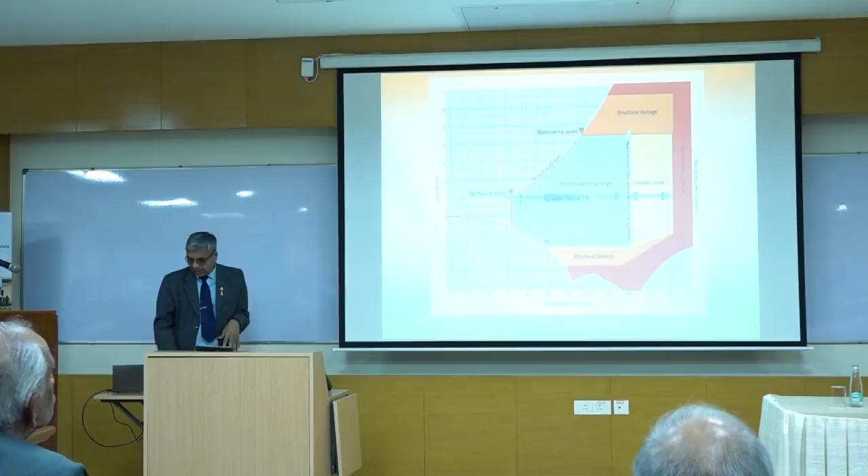The previous talk already covered system engineering and multidisciplinary aspects. So the key part here is handling - stabilizing the aircraft while giving good handling quality. That's the very key part actually.

We have got a spectrum of the pilot and human being. It is very difficult to model the transformation. Handling quality is a qualitative part, and we have to map it into quantitative. So how do we do it?

Various simulators we use, and then various criteria there. Couple of papers are published and all other stories are there. But overall, it is going into the designing, going to the hardware, going into the system.

All over the nation we have got various things, especially in Bangalore across the HAL runway, various hangars, and ARDC has got a reach where we did controller testing. Previous talk already covered multidisciplinary, whether it's a missile problem, aircraft problem, or rocket problem - launch vehicle, all have got multidisciplinary. It's not only aero, but control guidance plays a very key role.

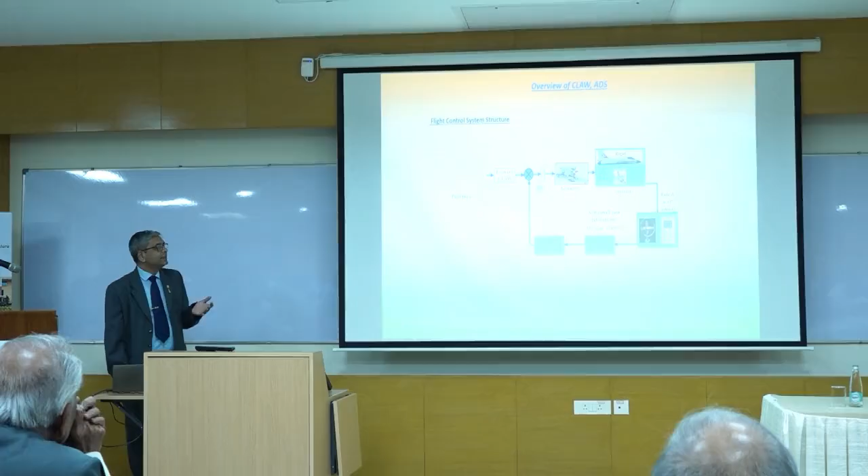When you fly the first time, obviously you need to do aero calibration, aero update, flight envelope expansion, done based on wind tunnel design. It itself is a lengthy process, and because of the man on board, you have to be very cautious. It's not only the control system, it's the identification - making sure that you are going to fly at the edge of the flight envelope.

So in order to give a product to the squadron, you have to fly carefree maneuvering. You need to certify carefree maneuvering, you need to do carefree flying, and that's the key part. Make sure that while doing this, you still go gradually, and that's fixed. Then comes in the hands-off flying, that is autopilot.

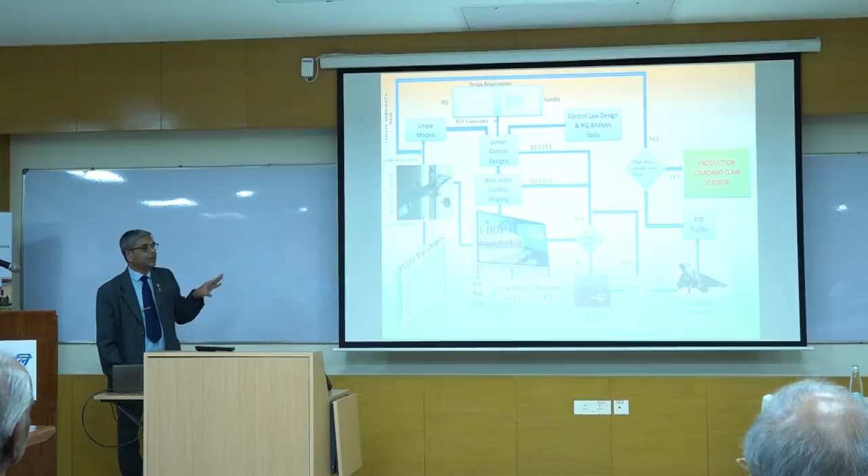Today I am going to talk about climate resilient geotechnical infrastructure for a sustainable future. The outline of my presentation is I will briefly discuss the research focus, then the contributions we have made so far in this field, and then a concluding remark.

We all know that climate change is evident and is a modern day threat. Therefore, we are receiving increased intensity of rainfall. We have issues related to groundwater abstraction as well as drought, and this is impacting various geotechnical infrastructure. Our aim of research is to recognize this interaction between climate and geoinfrastructure, such as subgrade soil, slopes, and foundation.

Our approach is more preventive than reactive. We understand we are dealing here with a natural material that has a tendency to respond to changing water conditions. Because of that, the property of this material, which is soil, changes under the condition when it is subjected to drying and wetting phenomena. We aim to achieve this understanding through laboratory testing, field monitoring, and numerical modeling.

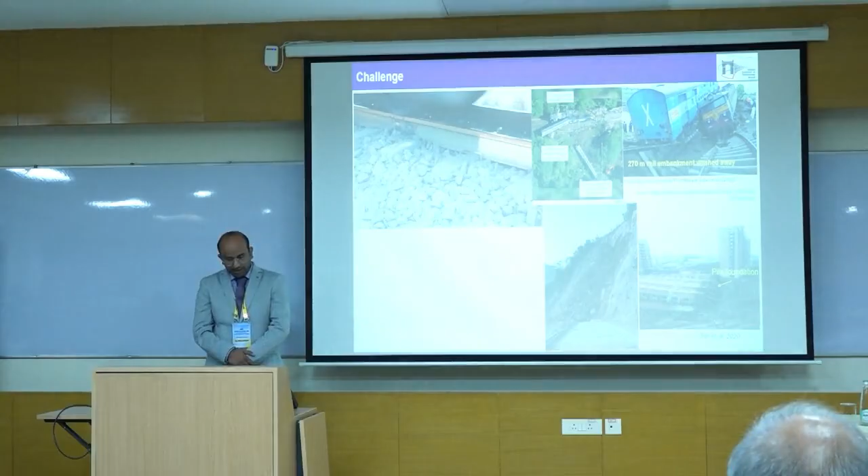As you can see, because of heavy rainfall there was a collapse of this particular building where the pile foundation is exposed. Coming from Himachal, we received a lot of landslides, and the frequency of landslides has increased in recent years. We have seen this year as well as in 2023, and these years were never before when we compare the intensity and frequency of landslides, which has increased.

We should realize that the impact of extreme weather events and climate change is accelerating faster than its planning. Therefore, we must incorporate hydraulic loading while designing geotechnical infrastructure.

The way to include it would be through suction, which is the negative pore water pressure present within the soil particle at its contact when the soil is in an unsaturated state, mainly the difference between air pressure and water pressure when water pressure is lower than air pressure.

It is represented in terms of soil water retention characteristic, which is the relationship between degree of saturation, indicating the amount of water present within the voids of the soil, to soil suction. This property is hysteretic.

That means it depends on how soil is subjected to wetting and drying. Because this property of soil, suction, affects the strength of the material, its water holding capacity, its volumetric behavior, as well as stiffness, infrastructure performance gets affected when soils are in an unsaturated state and subjected to wetting and drying phenomena.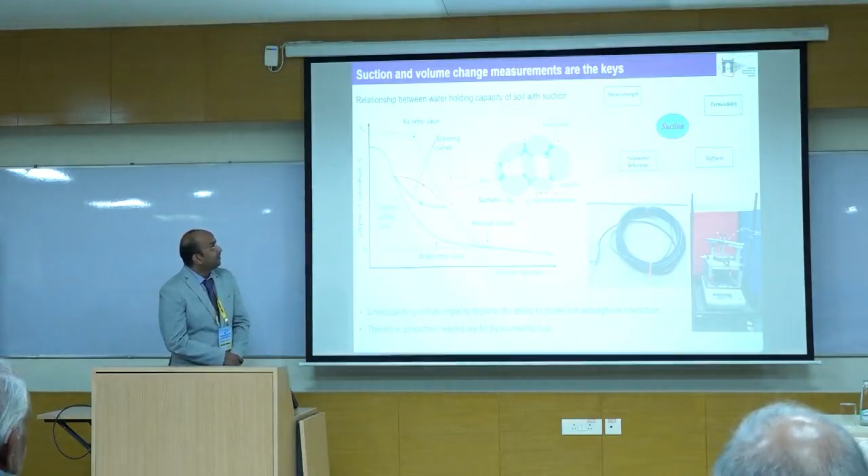The way to measure it would be through this device called a tensiometer. This is the device rig we developed in our laboratory, aiming to understand the volume change characteristics of the material and measure suction, then represent it onto this space to understand its engineering behavior.

To first understand how material behaves under wetting and drying phenomena, combined with loading from traffic for linear infrastructure, it can be mechanical loading in terms of monotonic and cyclic. We devised a testing protocol where we kept a tensiometer on the sample, then subjected the soil to different cycles of wetting and drying, and applied cyclic loading to understand the performance of subgrade soil.

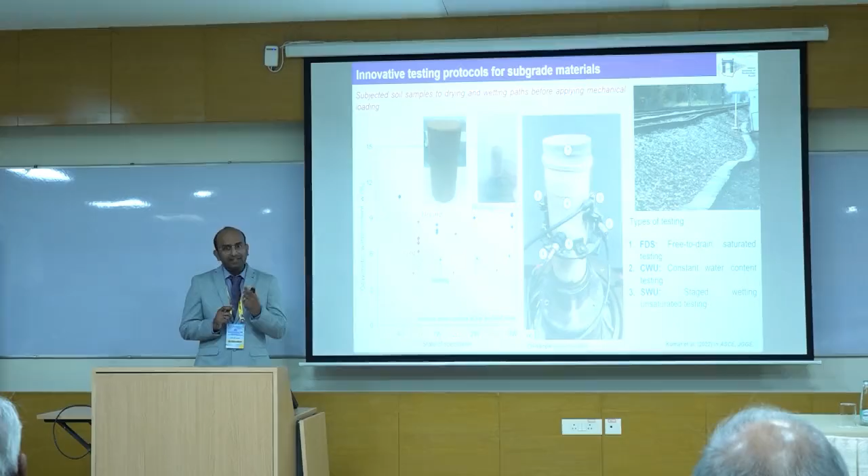We subjected the sample to different levels of hydraulic loading. First was free to drain loading, where samples were fully saturated, voids completely filled with water, then we applied mechanical loading. Another case subjected the soil to constant water content with mechanical loading applied. We also simulated a condition where we injected water and applied mechanical loading, simulating rainfall happening at the same time a train is moving onto the pavement.

With the help of this, we were able to understand that the suction characteristic, which governs material strength, is not able to fully capture the material behavior. We need to consider the stages of hydraulic loading and how the wetting and drying path is applied.

As you can see here, when the sample is subjected to different drying and wetting paths, the samples behave differently. This is the result of cyclic loading.

When we apply mechanical loading in terms of monotonic loading, we observe that the sample, when subjected to higher hydraulic path, develops cracks, which eventually came up in terms of evolution of its deviatoric stress. So it affects the behavior.

So we need to account for both of these conditions, and we understood that the cycles of hydraulic loading affect the behavior of material, either when subjected to monotonic loading or cyclic loading in terms of mechanical loading.

Therefore, in order to understand how we can limit water infiltration within the material, we developed a technological solution. We chose a waste which comes from a water treatment plant, called water treatment residue, which has a very high amount of fines.

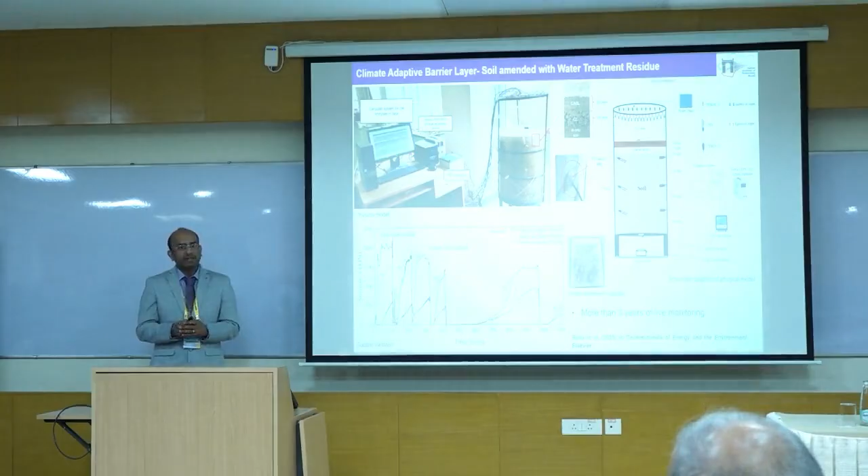And because of that, it can serve as a cost-saving foundation alternative.

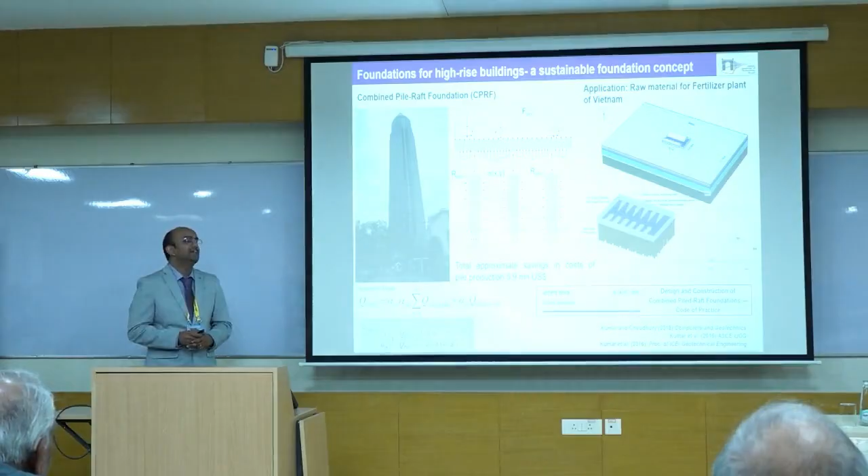In addition, after so many years of working in this area, I was fortunate enough to co-author the code of practice, India's first code of practice on design and construction of combined pile raft foundation, which is IS 19117, recently published by the Bureau of Indian Standards.

Then we tried to understand that when this foundation is subjected to wetting and drying, how it responds to that. We subjected the pile foundation to different conditions of wetting and drying - one can be groundwater abstraction, another can be rainfall infiltration. We found that groundwater abstraction or groundwater addition helps build so much additional load to the pile foundation, and that needs to be accounted for.

We considered the case of a freestanding pile, where when the ground is moving up, it has a tendency to move the pile up from the top, and then it has a tendency to pull the pile down, creating lots of tension in the pile, which we obtained through this. We highlighted that this loading consideration, which has not been considered till now in the design, must be considered for lightly loaded structures.

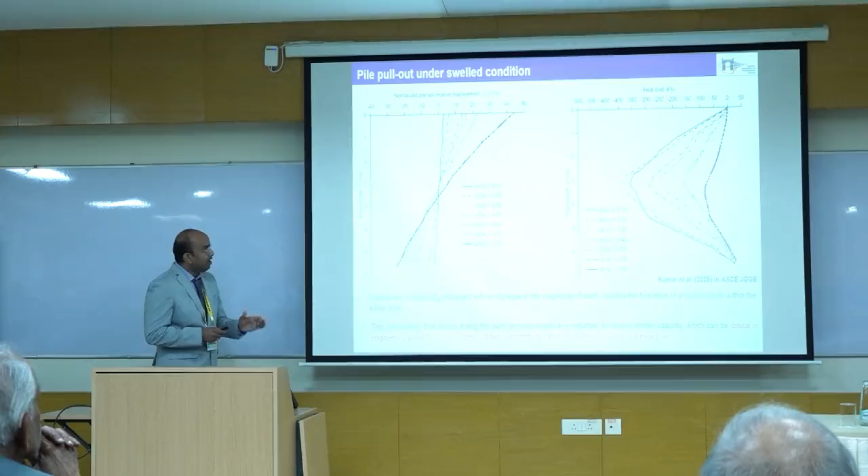We also developed a physical model at IIT Mandi, trying to understand water migration, and how the wetting and drying phenomena would affect the performance of the pile when water migration is happening. We currently have one year of monitoring. We are trying to understand the load bearing mechanism of the pile, which eventually can contribute to the practice in terms of design of pile foundation, which is yet to be established.

Coming to my concluding remarks - through our research, we were able to establish an experimental framework for subgrade soil, including water path, hydraulic hysteresis, as well as mechanical loading. We developed a technological solution to limit water infiltration. We provided settlement-based capacity for combined pile raft foundation, and we accounted for how changes in soil suction and volume can cause uplift to the pile or generate tensile forces, which was contrary to earlier findings. We also co-authored India's first code of practice on the combined pile raft foundation system.

With this, I would like to acknowledge my PhD supervisor, Professor Sivakumar, my postdoc supervisor, Professor David Toll from Durham University, my students, funding body, and various collaborating institutions.

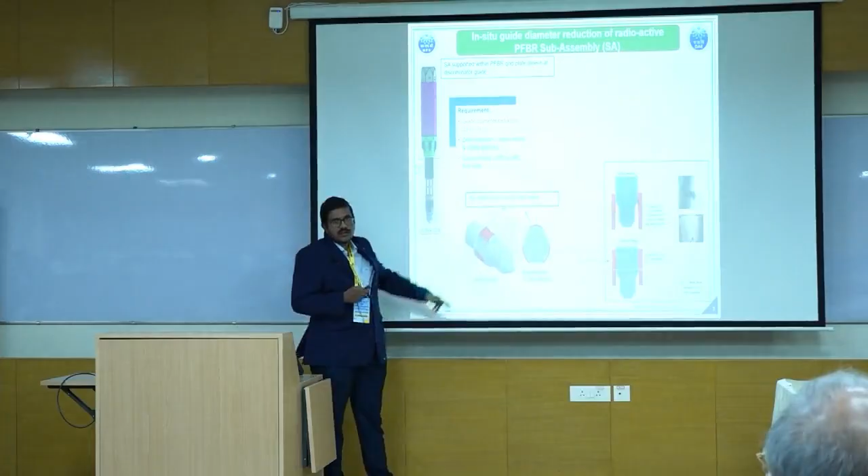So the requirement is to reduce this guide diameter by 20 to 100 microns radially, and all the assemblies are manufactured and filled with plutonium oxide fuel. Zero rejection has to be respected - any rejection due to overgrinding this part will lead to rejection of the entire fuel subassembly.

As you know, plutonium oxide is not a naturally available isotope - it is man-made. We have to maintain concentricity of this axis after removal with respect to this foot axis, and it should be within 50 microns. So the challenge is there is no ready-made solution for it - we have to engineer the solution.

Then the operation should be remote because it's a radioactive subassembly, and we have to meet this schedule. It is a very long subassembly with significant weight. And the discriminator, the section in which we have to work, is not a complete circular section - it has 3 segmental cuts. This design is meant to have some leakage sodium cooling flow in the reactor.

There were hydraulic studies - this shape has come about. So the design is, we have designed a CNC belt grinder machine where we can control speed, feed, drag angle, everything with CNC. And that grinder self-centers with the subassembly. We also gave an automatic subassembly arrangement.

It has many programmable parameters for targeted material removal, because in manufacturing we have tolerance. So depending on the as-built tolerance, material removal should be variable to achieve the required final dimension.

Then we have to qualify the process, because without proper qualification we don't get approval to touch the radioactive product. So what we have done here - these are mock-up test pieces which we have made. We divided the entire section into 16 cells, wherein we made a 0.1 mm deep groove, and we measured the material removal by measuring the step height before and after grinding, so that we achieve uniform material removal of 15 microns across and along the length.

Subsequent to qualification, we executed and installed the machine at the reactor site, and qualified it at the reactor site, and all 370 subassemblies were modified with 100% recovery. On-time execution facilitated loading the blanket, and last year in March, the Honorable Prime Minister visited the reactor site also.

So we got clearance from the regulator for the concept, design, qualification, operation time and operated dose, because putting the subassembly onto the machine, dialing it, setting the parameters is manual, since the dimensions vary from subassembly to subassembly. So only this part is manual, the remaining grinding part is automatic.

Even for this process, we calculated the time, and the dose is estimated by the reactor physicist, and it is proved that the dosage limits are well within the actual limit. So the novelty is there is self-centering and grind force control - we have numerical control of position, speed and wrap, we use standard belts available in the market for different grit sizes, and we have overgrind protection.

This grinding tool can handle any geometry or material with programmable removal rate, so the tool can be generic. Here's a 3D model and plan view of the tool, showing the sub-assembly and the discriminator part with a self-centered design. We use a standard belt and apply grinding force by rotating the sub-assembly and giving linear speed to the belt. This is programmable and variable, and we've optimized the parameters for this material. The tool can also be engineered for different geometries.

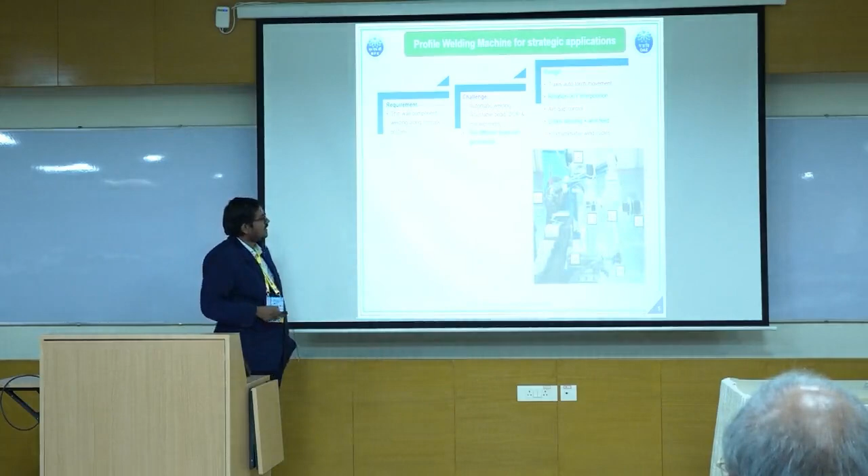This is a picture of the 7-axis machine showing the C-axis and Z-axis, the XY interpolation of the torch, and delta X, delta Y used to get the required weaving for a sound convex profile shape.

We've qualified this process for square, hexagon, and ellipse profiles. Overall, it's a teach profile system where any profile can be taught in 3D, and it's a modular design, with everything built in modules. For example, if you want to weld a big channel or pipe along its length, we can reorient the head and perform the welding.

This machine is compatible with TIG, EB, and laser welding, with or without filler. We used TIG in this process due to design requirements, but the same setup can be used with laser as well. The next application is the radioactive granule transfer system.

In PHWR, pressurized heavy water reactors, uranium dioxide pellets are cold pressed to achieve the required shape and densification. Previously, NFC used hydraulic-based final compaction presses, but NFC has since moved to rotary press technology, which increased production fourfold, from 30 kg per hour to 120 kg per hour.

The challenge was that the press supplier required granules to be loaded into a hopper elevated 4 meters from the ground. So 120 kg of granules had to be lifted 4 meters and filled into the press. Since the plant was very old, there wasn't enough space for a first or second floor gravity-based loading system, so we had to lift it from the ground.

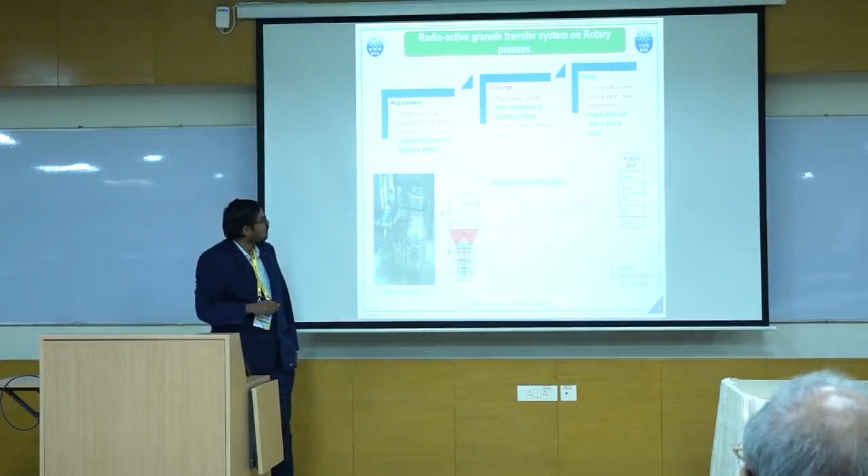So we designed an innovative conical valve assembly, a spring-based system, incorporating locating, docking, sealing, and opening functions, ensuring a leak-proof transfer of granules from the hopper to the press hopper.

The next part is small automation which we have done - the green pellet density measurement system. The pellets pressed in the previous rotary press are called green pellets because they are virgin pressed pellets. Here we need to measure the density of the pellet.

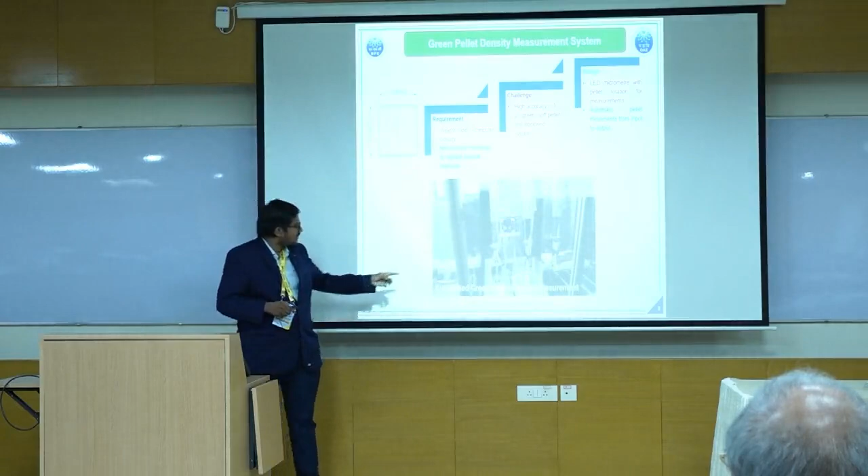The beauty is the diameter and length of the pellet are constant because we are pressing it at 100 bar pressure. Since the geometry, concentricity and cylindricity of the pellet is unique, we have used a laser LED micrometer to measure the diameter and length of the pellet. From this we can calculate the volume, then measure the mass, and finally calculate density.

Previously the operation was being done manually using micrometers. With this, there is an improvement in the radioactive exposure to the operator also.

The next part is the appendage welding machine. This is a typical PHWR fuel sub-assembly - these are 19 element sub-assemblies. Small tiny appendages like spacer pads and bearing pads are welded onto the assembly for different functional requirements in the reactor.

Our predecessors designed resistance-based welding machines, and we are continuing that technology to manufacture a series of machines for NFC and the new plant set up at NFC Kota. The dimensions are very thin, 8.6 by 2.5 mm. We have 3 thickness variations - 0.6, 0.8, 3.25 mm - and bearing pad is 33 mm by 2.5 mm, thickness 1.1, 1.9. So very tiny pads.

Here we need to weld it so that during welding there is no indentation on the ID of a 0.4 mm tube - the thickness of the tube is very small, 0.4 mm. With no indentation on the ID side, you have to weld it. So the requirement is to manufacture a series of machines.

The challenge is the machine should have automation for accommodating different sizes and thicknesses of tubes. So we have made a machine, and since it's a resistance welding machine, we go with statistical process control, wherein for 300 continuous welds we do strength testing and distortion testing, and the X-bar minus 3 sigma should be less than the required limits.

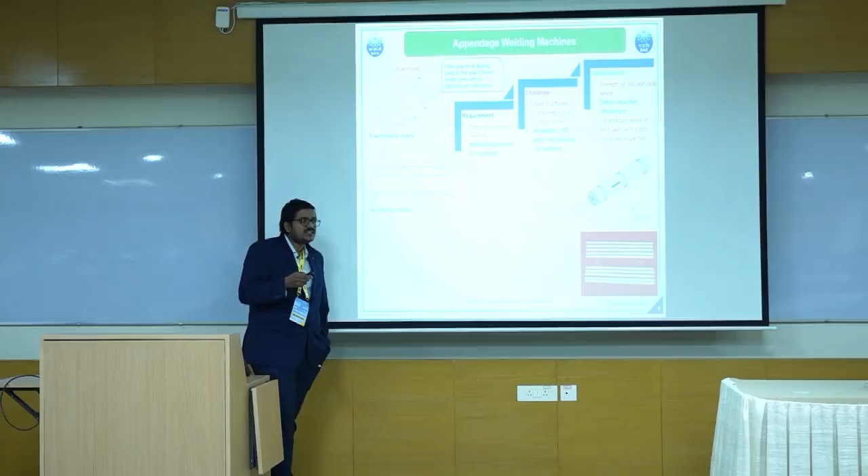Once you qualify the machine, all subsequent production in that shift is qualified. We have also incorporated innovative defect mitigation systems, because the loading of components is manual and the entire monitoring is manual. So we put in solutions like current monitoring, appendage monitoring, and orientation of the pad monitoring, so that we could achieve very near 6 sigma.

Like 10 defective welds in 16.5 lakh welds. India is the only country in the world to develop this technology, and the only country to use resistance projection welding for joining these appendages. Countries like Canada and other nuclear countries follow a brazing method instead.

Because NFC is manufacturing around 1000 tons of fuel, and each bundle is around 25 kg, you can imagine how many bundles are being manufactured.

The next one is the advanced testing machine - this is for the same weld joint. Once a weld joint is made, we have to destructively test it as a process of qualification and setup. Here also the requirement is to measure the strength for different configurations.

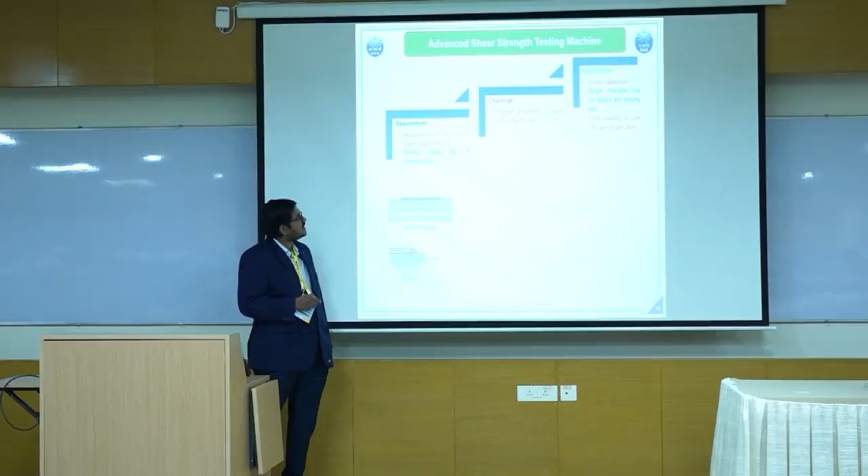The challenge is to have precise alignment of tool and joint, because there is only 40 to 50 micron collapse. The tool should actually go and shear this joint. If the tool shears the pad or the tube instead, we get higher strength readings, which means it's not a correct testing method for the process.

So we made a small gadget for that, achieving precise alignment, because the qualification of the process depends on the accuracy of this testing.

In summary, critical nuclear applications have been achieved for DAE. All our original concepts were developed in-house, with high reliability and user-friendliness. They are fail-proof and foolproof with 100% recovery. A high level of sophistication is achieved, and defect mitigation solutions are incorporated into the machine, almost very close to achieving 6 sigma quality. Thank you.